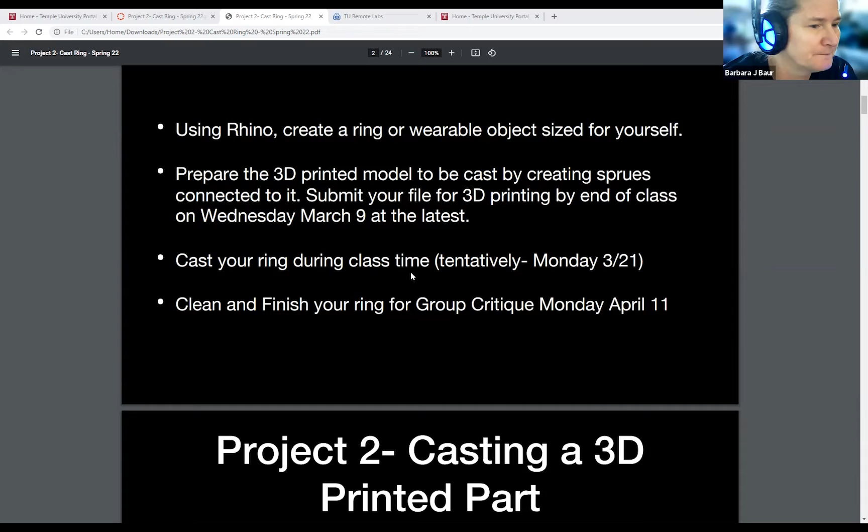So here's the dates around this project. They will show again at the end of the presentation. And by the way, you do have this presentation in Canvas.

So we're introducing the project today. Next week, we're going to have one-on-one meetings about your project. You should have sketches by then. Then the files are due for submission the day we get back from spring break, that is Wednesday, March 9th.

We're going to work on post-cure and investment casting. Post-cure means that our castable resin needs some preparation before it can be used in the casting process. This involves first cleaning the support structure off of it and sanding it to make the surfaces smooth, and then the 3D print tech will soak it in glycerin for a certain amount of time, and then give it extra time in the UV cure chamber of about an hour and a half.

So this is not something that you guys can actually do. It has to be done by the 3D print tech, but you have to prepare your 3D print part to give it back to the 3D print tech before they will do the post-cure process.

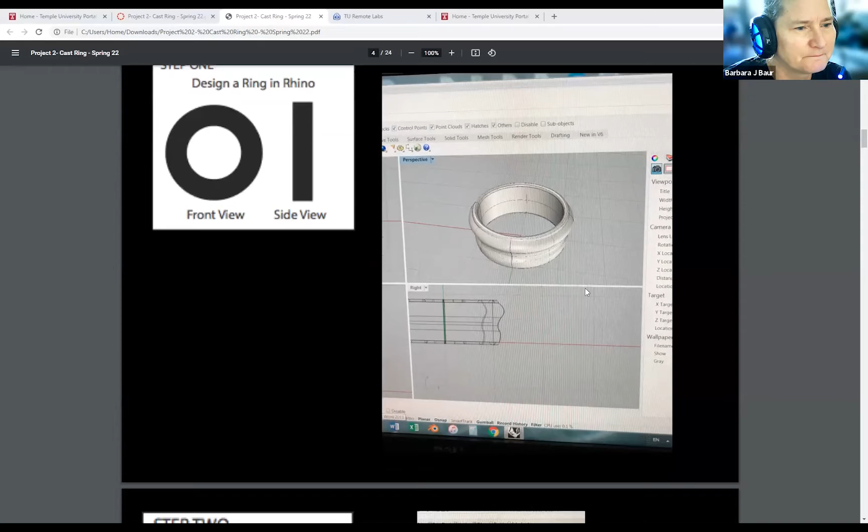So let's talk a little more about all the steps involved in this. As I said, there are a lot of pieces to creating a 3D printed part and then having it cast. So the first thing we're going to do is design a ring in Rhino. This is a real simple ring that I designed as an example - I basically used sweep 2 and a curve for the side and the inside.

Then we add sprues. For those of you not familiar with the lost wax casting process, these sprues are needed for the metal to have a place to flow into your ring. The metal comes in through the sprue and then into the ring area. I realize that may sound confusing if you don't know much about this yet, but trust me.

So we have to set up the sprues. This is just a quick idea about it: we have a big central sprue, we have another sprue here, and we can do sprues on the inside of the ring that get cut out. There's a lot of different ways to sprue it, and it all depends on what your ring looks like, because not every ring is sprued the same way.

The next thing we'll do is go through Netfabb, which is a file cleanup program that we use. It helps make the mesh more printable. We have to export our Rhino objects out to an STL file, which stands for stereolithography.

And then we'll send it to Netfabb, we'll fix it in Netfabb, and then we'll submit that file on the server to the 3D printing folder under Form 2, under castable wax.

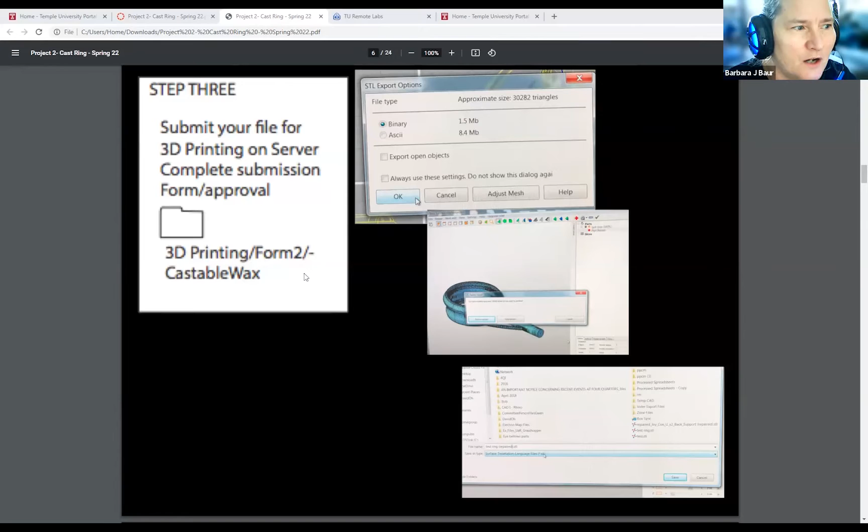Anytime you submit anything to the server, I must approve it. We have to send a form to the 3D print tech saying there's a file that needs to be printed, it's for this class, and this instructor approved it. So you and I will be doing this process together.

Step 4, we'll get it back. This is what it's going to look like. It's going to have all this little support structure stuff on it, and we don't necessarily want to keep that. We have to get that cut off.

We're going to have a sprue on it. In this example there is no sprue on this, but we will have one. There are certain special tools that we keep in the tool room for this process. We use the plastic cutters meant for cutting 3D prints or plastic. We don't use our metal tools on these.

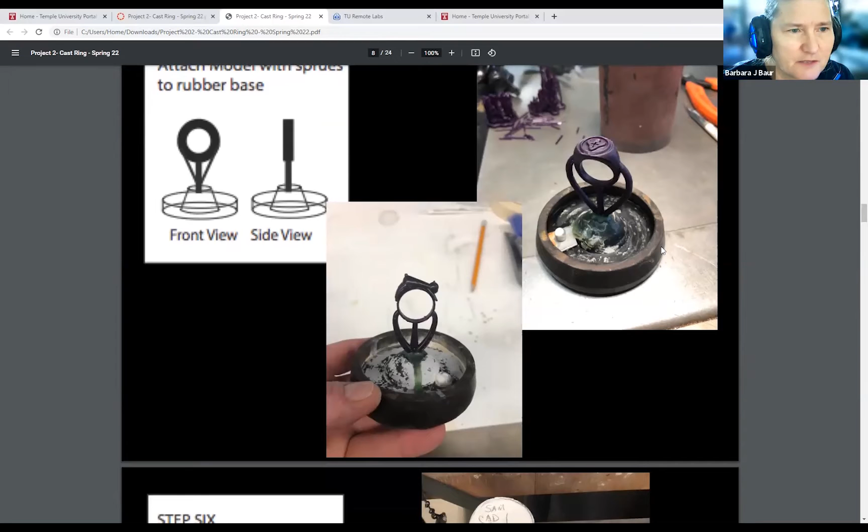Then we'll also sand out the little spots where these attach. And then we'll take the ring and the sprues and attach it to one of our rubber bases. The rubber bases match the flask, which is this cylinder in the back—like an empty can made out of steel. So you see I have two different rings here that have been attached into the rubber base.

Before this happens, though, we have to weigh it. I thought I had a photo of that, but we have to weigh our wax so that we know how much metal we're going to need when we cast this.

The next thing we do is we invest, and this has nothing to do with putting our money in the stock market or in certificates of deposit. What this has to do with is putting a plaster-like substance called investment.

Like plaster, it has a certain timed cure time, and we have to work within that time. We have to follow carefully, be clean, and be very aware of time while working on this. It's a timed process, and our investment will cure usually within 12 to 14 minutes, and we only have about 7 minutes total to work through this whole process.

So we will go over this during class. I'll take you into the back and show you the investment area. I will go through and invest things with you.

As the investment cures, you see we'll mix it up, we'll pour it in, and this is what the top is going to look like. This is what a fully invested flask looks like. We will mark it with names, class, metal, and the weight.

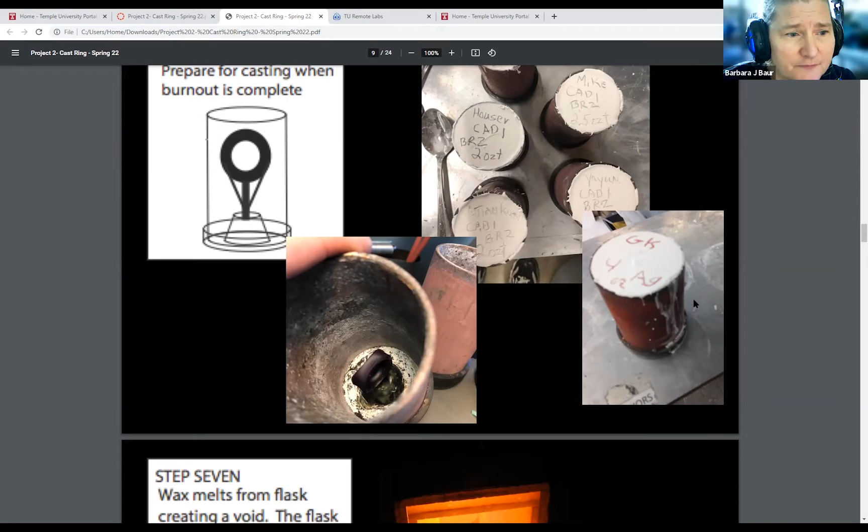Here we go. The 3D print tech will then take off the rubber base—or rather, whoever is going to start the burnout. We normally have a casting tech in MJCC, but this semester we do not. It's usually a grad student, but because of the situation this semester, all the instructors and the tech have to step up and try to do that for you.

So I will actually be starting the burnouts for our class. And that's why I said I'll be coming in on a Sunday night and I'll be starting the burnout.

At that time, I'll take off these rubber bases and load all the flasks into the kiln for Monday on Sunday evening, and I'll start the kiln. The kiln goes through a process where it stays at certain temperatures for a certain amount of time, then ramps up to a different temperature. It starts at 300 degrees, stays there for 2 hours, then goes up to 700 or 900. It's programmed - this is called a burnout cycle. Once I start it, it runs by itself until the next day.

After it finishes the burnout cycle, it holds the flasks at casting temperature, which in this case is about 900 degrees. We'll come in and adjust the kiln to change the casting temperature if needed. Sometimes when pieces are really thin, we'll up the casting temperature a little. If we're working in bronze, we'll maybe keep it at 900 to 1,000. It all depends, but generally the kiln sits at 900 degrees until we do something with it in the morning or afternoon.

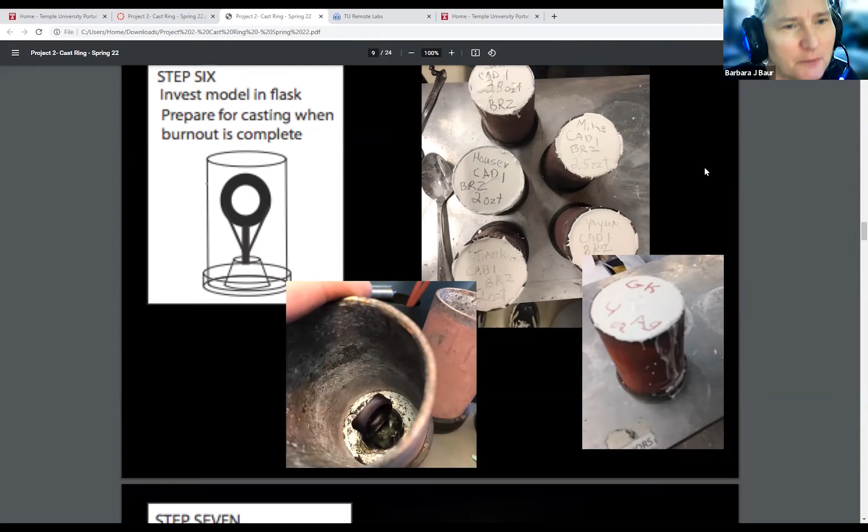It'll stay like that for 8 hours after the burnout finishes. If the 8 hours passes, the kiln will then stop staying at 900 and the temperature will start to drop. Once I come in, I'll be adjusting the kiln, and we may even start casting earlier if any of you can come in sooner than 12 o'clock on the day we're casting. We'll talk about that as time gets closer.

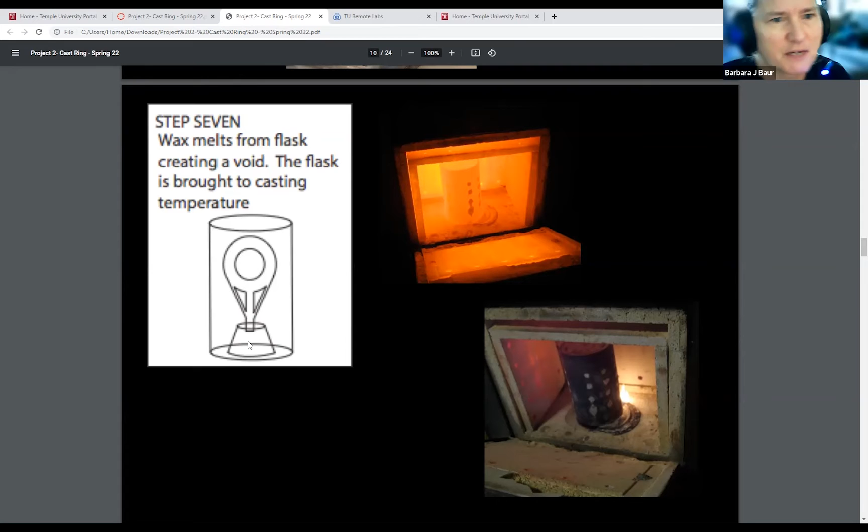So this is what happens during the burnout process - this is a different kiln, not actually ours. But in the process, you see the wax melts out from here. It's the resin-wax combination that melts through the bottom. Because we had this, you see this little bump - it's called a button - and we attach our sprues to that.

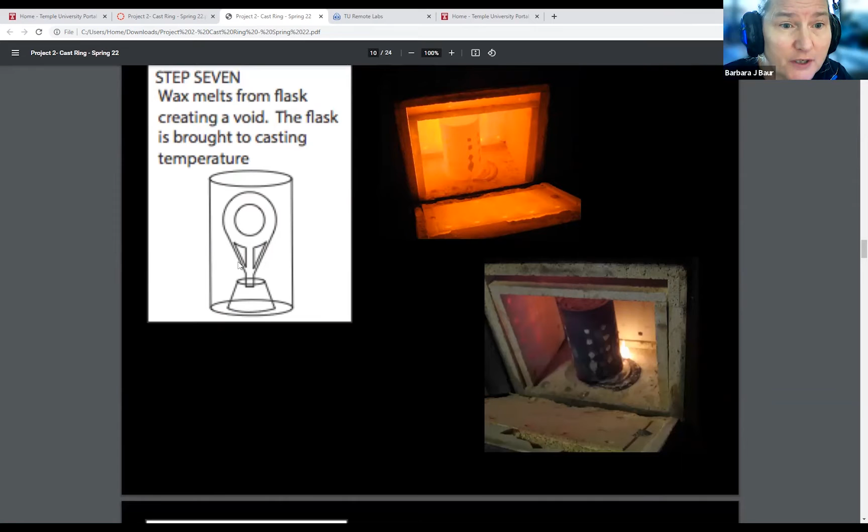When the rubber base comes off, that becomes like a little funnel, and that's going to help direct your metal into the void that will eventually turn into your ring.

So we'll then use our centrifugal casting machine - this is what we have in the back. By the way, this photo was taken before COVID, so we used to just stand back there close together, huddled around, watching the casting machine, then the lid gets pulled down and the casting happens. The centrifugal - what happens is the whole thing spins inside here. But now it's just me back there with you. We'll both be masked, have eye protection, and wear welding jackets to be fully protected.

So we'll melt the metal in the crucible in the casting machine. I'll pull the flask out of the kiln with tongs, because remember it's at 900 degrees or so. After it's spun around and the molten metal goes in, we'll pull it out of there and set it for a minute or two so it comes down to a temperature to quench it. If we quench it right away, we run the risk of causing cracking in the metal if it cools too quickly. So we want to let it cool so the metal is able to fully stabilize.

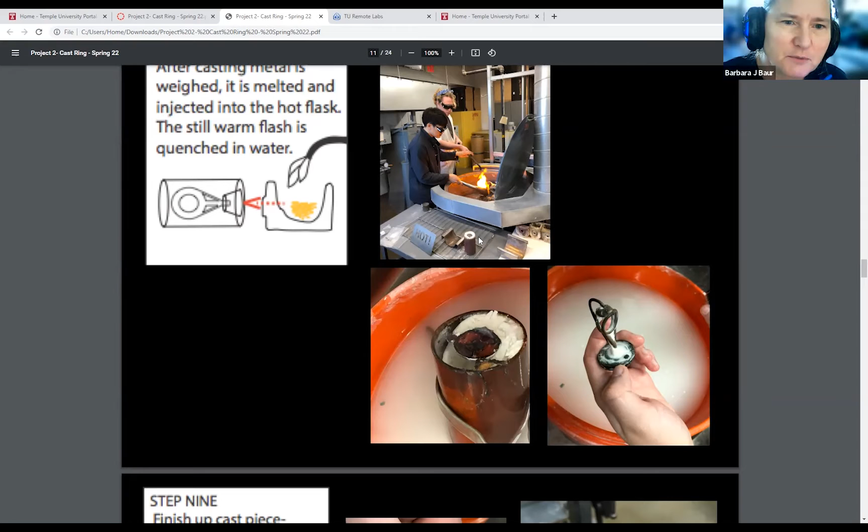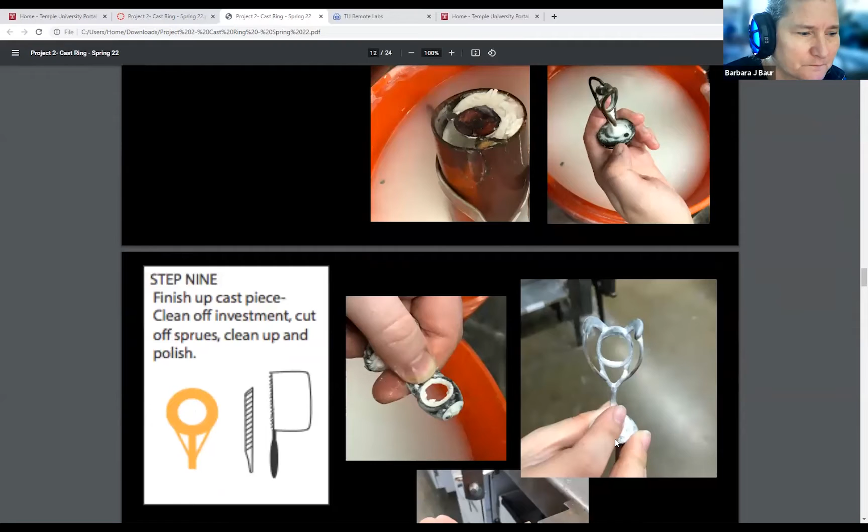Then while the flask is still hot, we'll put it into a bucket in the sink in the back area, and then start to clean away the investment. All of this was wax, or castable resin rather.

To finish up the piece, we'll need a jeweler's saw, files, perhaps some abrasive paper. We may use the scratch brush polisher. We've got some options - we could possibly buff them, use different finish ideas. We can use liver of sulfur to change the color of it. But this is how we'll get the metal piece.

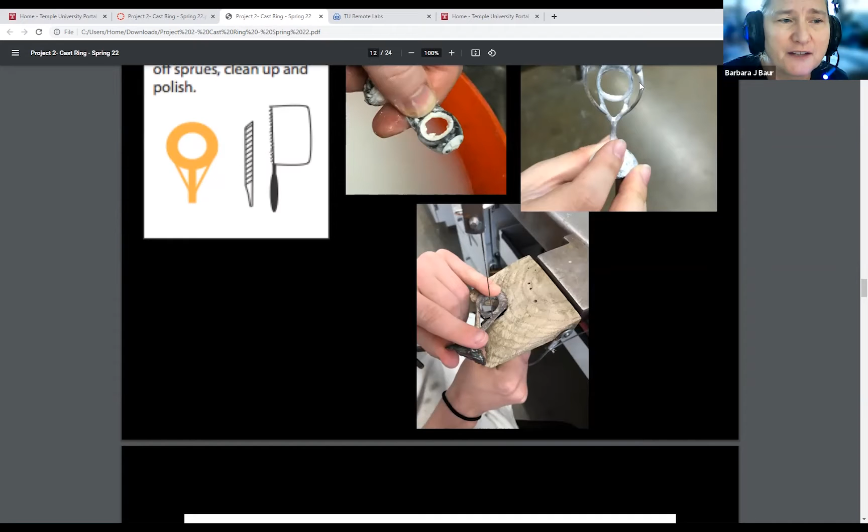The sprues will all still be attached, and we'll clean them up. This is why sprue placement is important - you want to put the sprues somewhere where you can cut them off and easily finish it so you won't see where the sprues were before. Here's that piece as it came out of the flask, and here it is after finishing.

Okay, here are some other examples. This was from two semesters ago. There's another one.

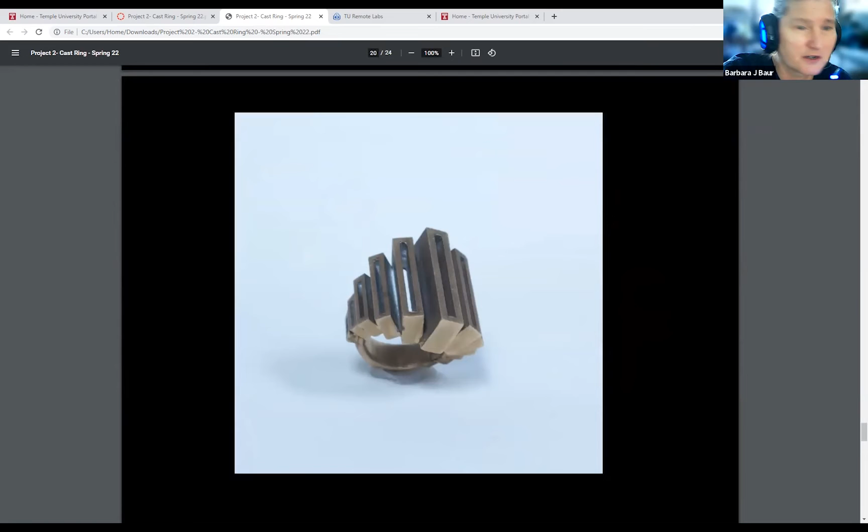Here's one from last semester. Here's another one from last semester. This one's from a couple semesters ago, if any of you know Teddy Kaplan, the senior. Great stuff, this was from last semester. These are all CAD 1, just so you know. So you have the potential to make things like this as well.

So here's our project overview again. We're going to use Rhino, and we're going to make a ring. We do want to measure our fingers, so we'll need to do that in class using calipers.

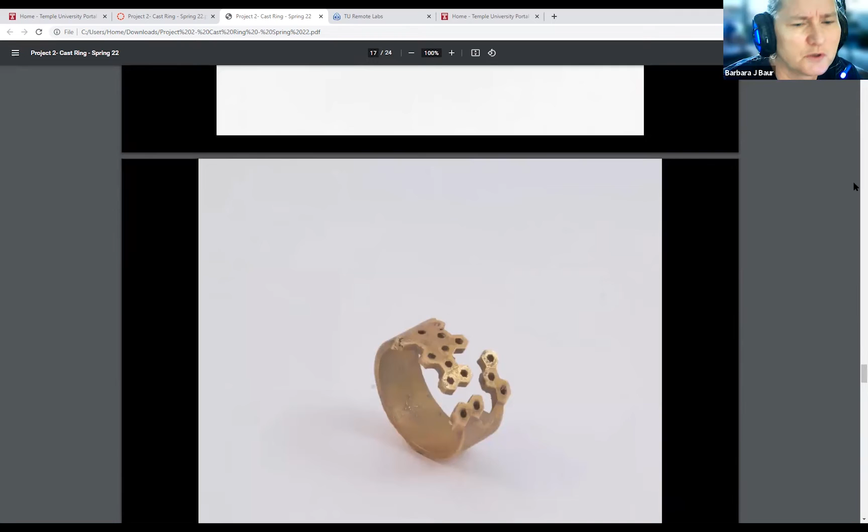Then we're going to prepare the 3D model, add the sprues in Rhino, and submit our file for 3D printing by... I don't think that's the correct date, I thought I had a different date up here. Where am I at? Wednesday, March 9th, okay, that's a month from today. We have a month to get these files done.

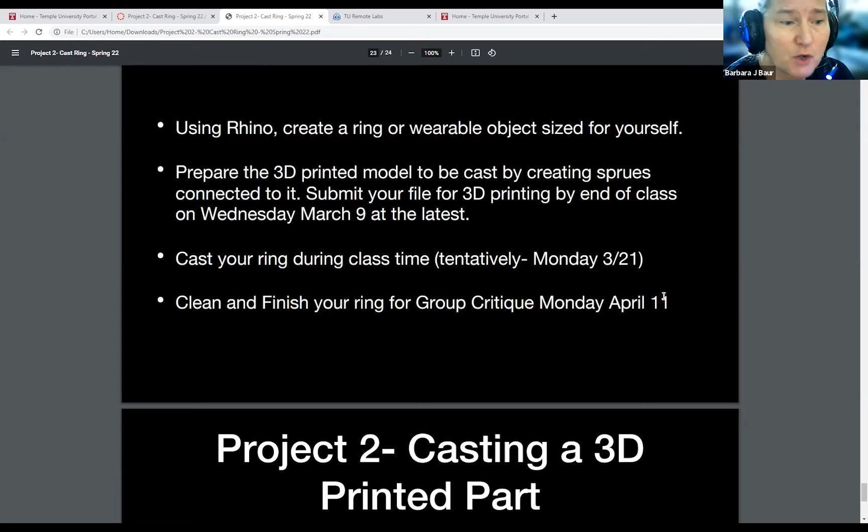End of class, Wednesday, March 9th. Then between cleaning off the support structure, post-cure, and investment, we'll need to get those invested flasks done so we can cast for Monday, the 21st of March. I'd really like to get everybody done during the same class period.

Then we'll take those metal rings and we will have a group critique on Monday, the 11th of April.

Here's more of our— this one definitely. Yeah, it's not Monday, March 7th, it's March 9th. And then the post-cure investment is probably the following week. I'll edit this, I'll make sure the syllabus is updated.

Okay, that's a lot of information. Does anybody have any questions? Nope. Okay, so maybe you remember from when we first went over the syllabus, the materials for this are included for bronze.

If you decide you want to cast your piece in silver, you are welcome to do that, but you will have to pay for the silver. We keep silver in the tool room for this project for just that purpose, and we have forms now that we use to connect with Brad Lunsford, our studio tech. Brad will set aside the metal you need. You will get enough metal to cast the piece, including the button, the sprues, and the ring. But after you finish casting, we'll cut off the sprues and the button, and they'll get returned to the tool room, so that all you pay for is the metal in the ring and not the metal in the entire casting. This is actually really helpful, because that way you don't have to pay for a lot of silver you're not going to use. That is, if you want to cast in silver. Otherwise, bronze is included, and that is included in your course fees. And so is the cost for the 3D printing, the 3D printed part that we will have.

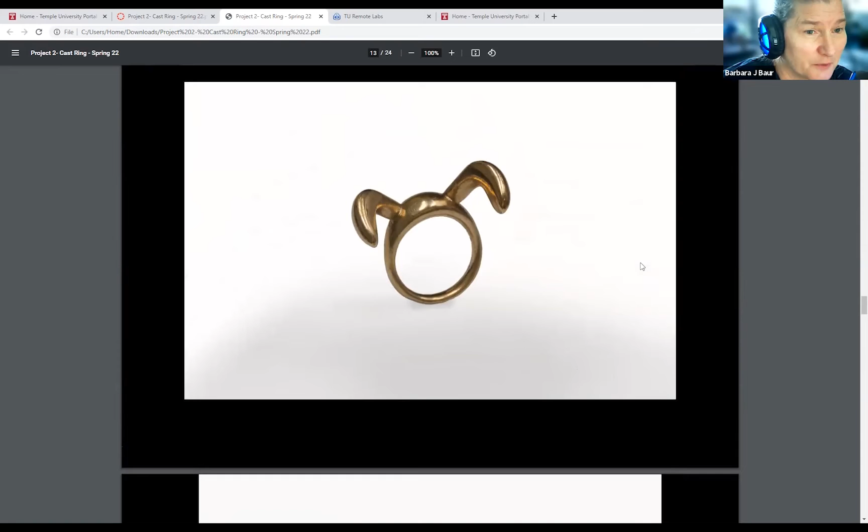This was actually done— it sort of looks like a sub D construction, but this was actually done before we had sub D. This was done two years ago, I think, now.

This was just a basic sweep-two or network surface command. Here you can see some of the spots where the support structure was connected and not cleaned off as well as it possibly could have been. So that's one of the things you're going to want to keep in mind.

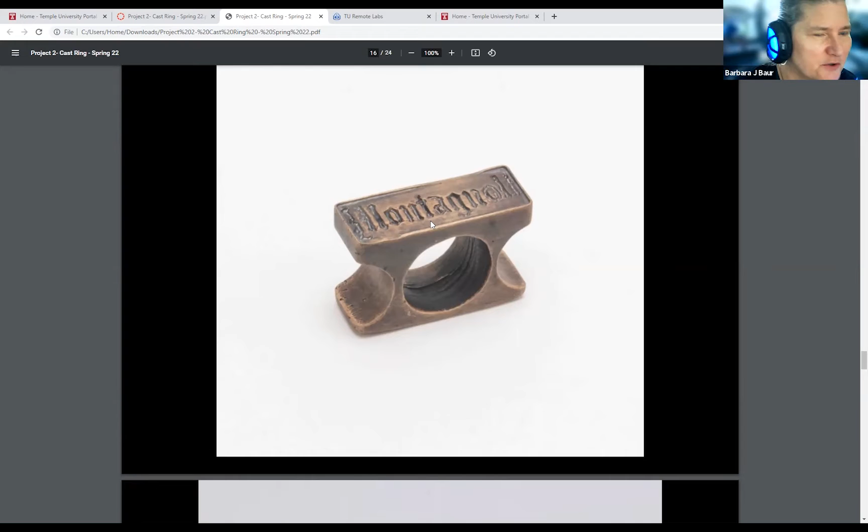So this was kind of fun. You can do stuff with this - it's a ring that fits, allows space for the two fingers on either side. It's a heavy ring. We've got a name differenced out.

We found that our success rate has gone up exponentially, because failures like this used to happen randomly. You can see a little crack over here - we would get porosity. What was happening was during the burnout part of the process, you have your piece melting out of the inside.

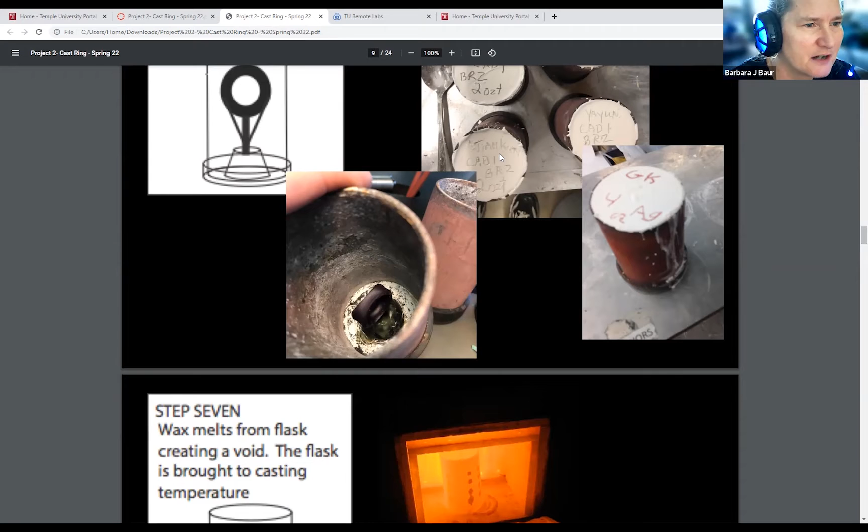This is where the resin is, and it melts. In the heating process, the resin actually expands a tiny bit. And if the investment is in a really intricate pattern, the pattern can break up a little, and then you don't have as smooth a surface anymore.

One of the things that has helped is the post-cure process, where we soak the part in glycerin and then cure it more in the UV light. That helps stabilize the piece so that during burnout, those expansions don't happen, which break up the investment.

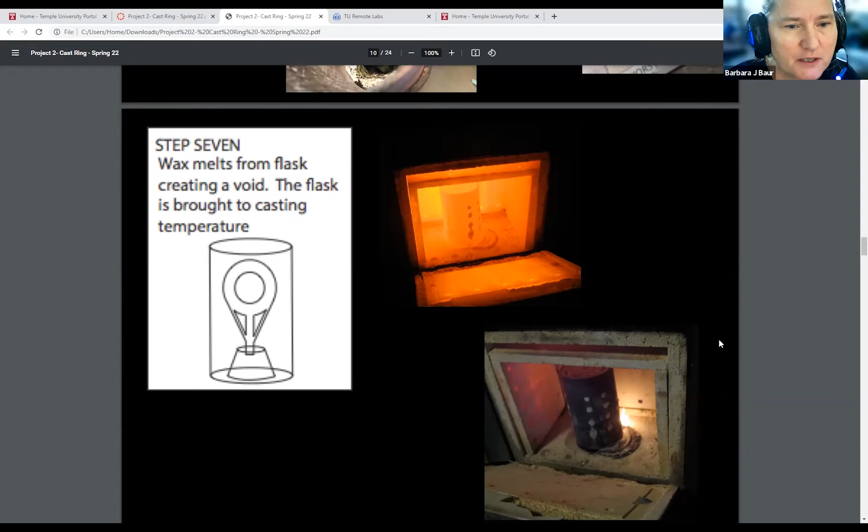So basically, this was laid out flat in Rhino. I'm going to show you some of these commands and techniques.

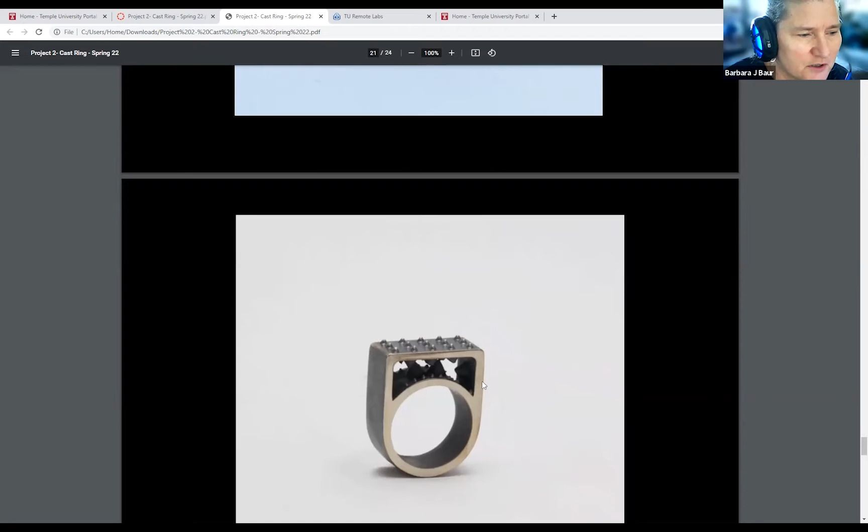This piece was colored using liver of sulfur. Teddy put it in liver of sulfur and then polished the sides, so you can see it's kind of darker here - it's darker on the inside and dark in this area. But this outside part, and on the other side as well, is shiny silver.

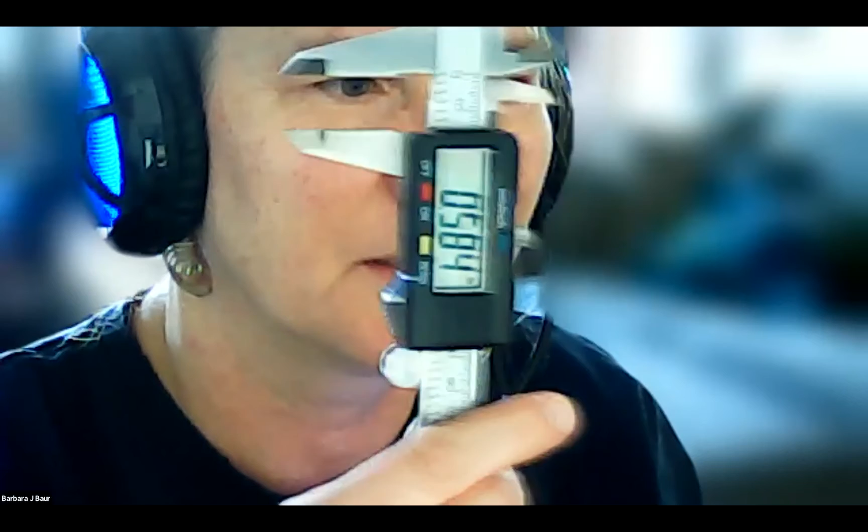Then I'm going to look at the number here. It says 0.584. So that's my left pinky. Your right and left hands, once you start measuring them, you'll realize they are different from one another. Okay, so that's 0.584. I'm going to write that down as left pinky.

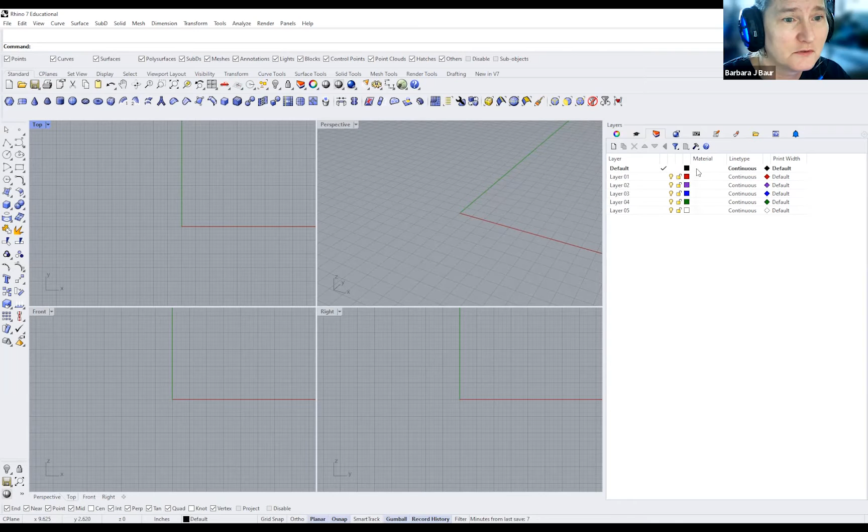So as I said, my left pinky is 0.584. Did somebody have a question? No, okay. So I'm going to go over here to the right hand panel, and there's this little tab here that is actually notes. I'm going to make some notes because these notes will stay with this file. I'm going to say left pinky measures 0.584 inches, and this is the finger that I'm designing for.

One thing you want to keep in mind too is that the diameter of your finger for rings actually changes throughout the day. On a more humid day, your fingers may swell. On a cold day, your hands may shrink or contract. So you want to try and measure your fingers a couple of times just to make sure.

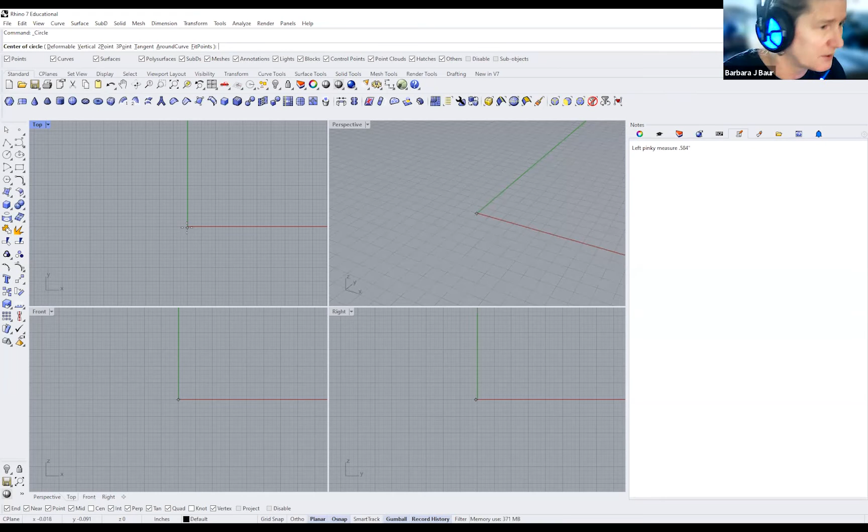Let's see what else we got here. So now what I'm going to do is create a reference for that. I'm going to start with a circle. It's asking me for the center of the circle - 0,0,0, that's where we're going to put it. And it's asking me for diameter, so I'm going to put in 0.584. Enter. All right, and that's where we're at.

Let's go ahead and pull this on the top. I like to make one of my layers a reference, so I'm going to call it pinky size reference. Let's put the 'i' in there - pinky size reference. And I'm going to move this curve here, this circle, to that object.

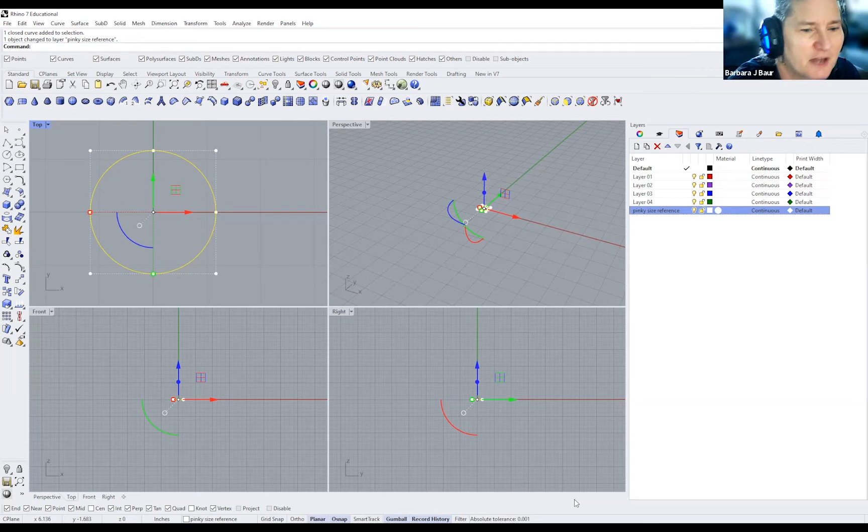Okay, do we have a new chat? Could we also measure our own rings that we know fit? Yes, you can, absolutely, and that's actually not a bad way to do it, especially if you wear that ring on a regular basis. I'll show you how to measure the inside diameter - you actually use the other part of the caliper, the piece near the top. But bring it to class and we can measure that. It's also important to try and measure your fingers too, and just get a feel for it. Great question though, Claire.

Okay, so we have this here, that's our pinky size reference. Now once we go building our ring, we can hide that or show it. But one thing I do want to do is lock that layer. But before I do, I'm going to make a copy of it. I'm going to call this working ring design.

This red layer - I'm going to take this and make a copy of it. See how it says copy objects to layer. So now there is, and it doesn't look like anything happened, right? But if I lock the white layer, I can hide it.

All righty. Sultan, are you having internet issues? Okay, I guess so. Yes, sorry, that's all right, that's okay.

This happens, just keep coming back. And let's see, Anne, you raised your hand. What do you got? Go ahead and unmute yourself and you can just yell out. Oh, I didn't mean to, I'm sorry. Oh, okay. All right, no worries.

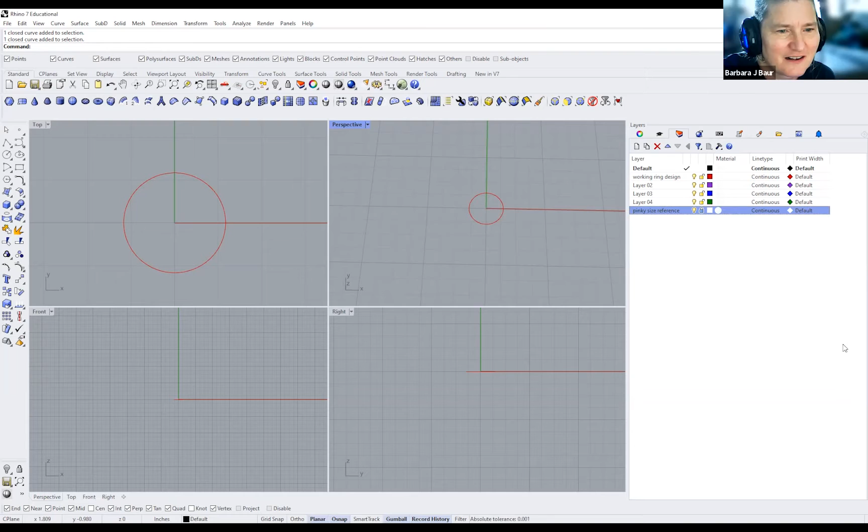Okay, so here I've got my ring size. So there's a lot of different ways that I can start to make a ring here. One, I can do the example that I showed you in our presentation, which was done with like a sweep 2.

What we can do here is I'm going to make a line from the midpoint. I'm going to make sure my quad osnaps are on. Yes, they are. And I'm going to go over here to the quad, to the right-hand side there, and start my curve there.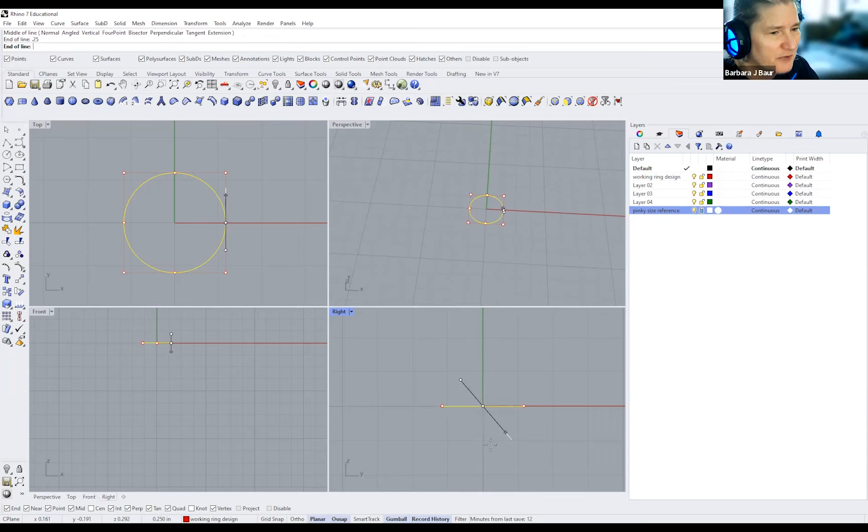And over here in the front viewport, or the right viewport, I'm going to hold down Shift. Let's see, if I want my ring to be like a half inch thick, I'm going to make each end of this line 0.25. So I'll do that and hold down Shift, and now this line is a half inch long. That could be the side of the ring.

And now I'm going to take a control point curve and go like this. All right, and there. I'm going to hit enter.

Right now, by the way, we have the default layer. That is our current layer, and remember, wherever the check mark is, that's where all the new geometry is going to end up on that layer. So that's why all these curves I'm drawing are black.

So I could join these two curves. Right now, if I select them, you see it says '2 curves added to selection.' You can see a lot of what you're doing up here in the command line. So I'm going to use the Join command, and now it says '2 curves joined into 1 closed curve.' Remember, Rhino tells you what it's doing all the time. So I've got 1 closed curve.

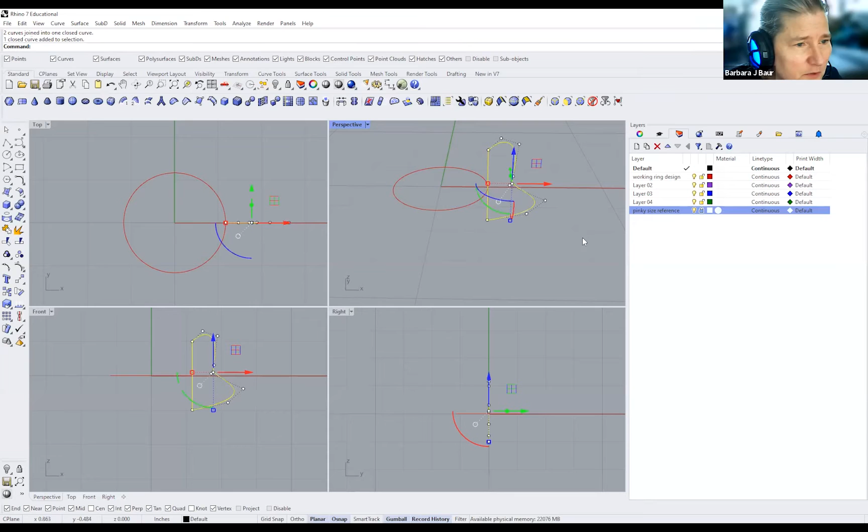I can use the Sweep1 command, and it says select rail. The ring here would be our rail. I'm going to hide our size reference. Then it says select sweep shapes, we're going to do that, and I'm going to hit enter. Okay, it says 'drag seam point to adjust, press enter when done.'

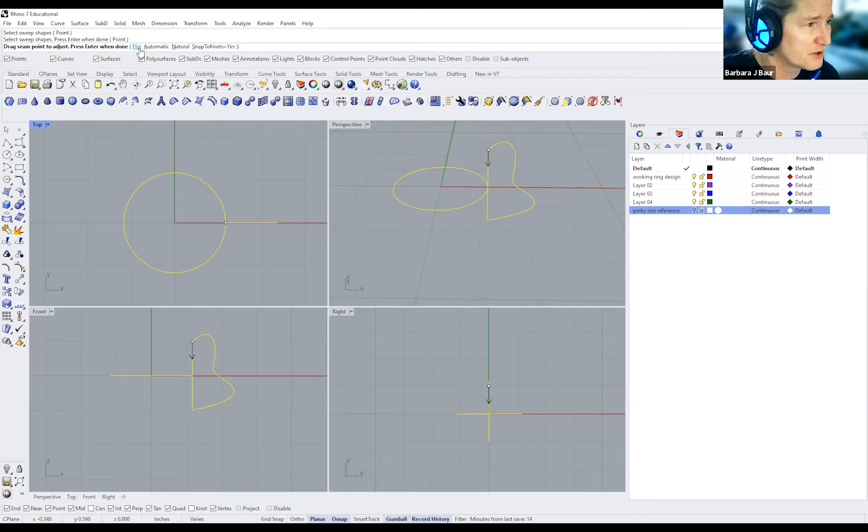All right, that seam point looks fine, we only have one. And here I'm hitting OK. Wow, and we're still in wireframe here. Let's go to ghosted so we can see what that ring looks like.

So we know this is the ring size that we have. I can tell you right now that this ring is going to be too small, even if that's the finger size. When your rings start to get really thick in this direction, you need to make them a little bigger in order for them to fit on your finger and be comfortable. This ring will feel too small, even if that is the diameter of the finger we measured, especially for a pinky ring. Pinky rings should be smaller.

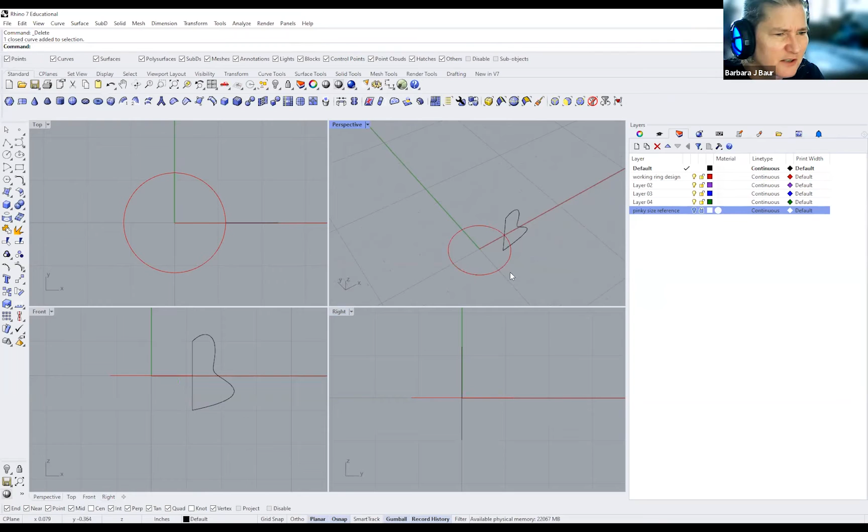So I'm going to delete this, and I'm also going to delete this. But before I do, let's take a look at how thick that ring really was. Let's use the Distance command, DISTANCE, and we're going to go from here to here. My goodness, that's 0.299 inches. That's more than a quarter inch thick. That's really thick, and to have that much width on both sides is a lot.

I'm going to delete this, and I'm going to show you another way. We're going to take this curve and I'm going to drag up. I'm going to tap Alt—if you tap Alt when you're dragging, see, it even says it in the command line, you'll get a little plus sign next to your gumball, and that means I made a duplicate. So now I have 2 curves. We can do another similar thing that we were doing with the sweep, but now we can use Sweep2.

So there's one curve there. And now we'll do this again, except this time we're going to make it a little more refined. Let's go here. Maybe we'll do this. Okay, and I like that. So I'm going to mirror it.

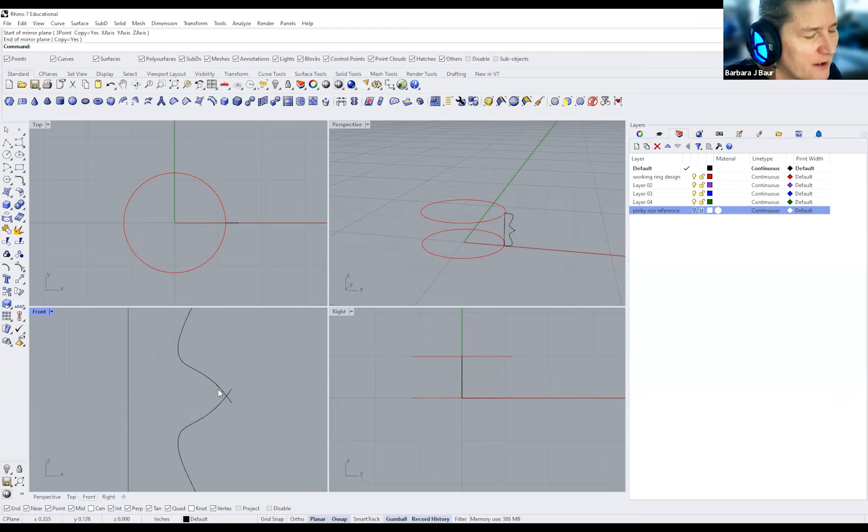I'm going to make a copy of it from the midpoint here to here. Those overlap, so I'm going to use the trim command. Remember, we just learned the trim command. I'm going to click on trim, and now I'm going to go here, and here. We're going to hit enter.

Okay, so the trim command broke history on those two objects. I'm also going to join those two. And now if I click on this, we have all the points. I'm going to delete that one. That'll make that a little bit nicer.

And now, instead of just sweeping that one around, I'm going to join this. Two curves joined. And now I'm going to mirror it. Let's try and do something a little more interesting, right?

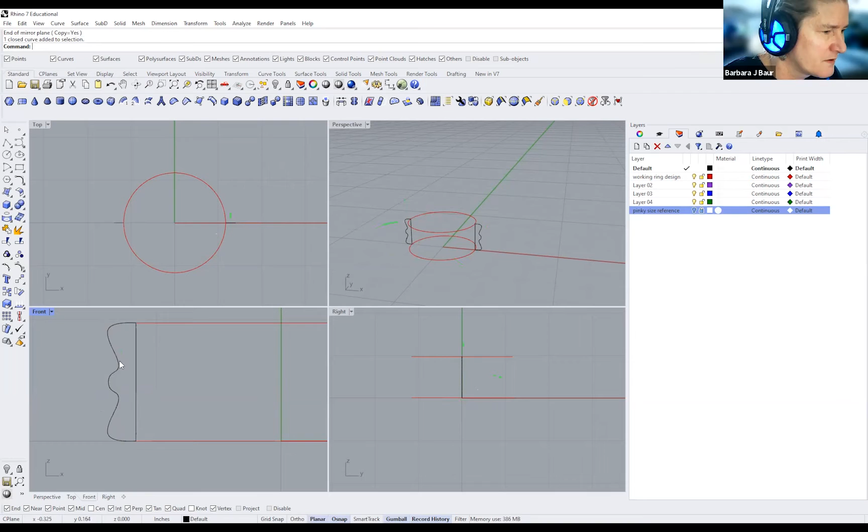Now we're going to take the one on the other side, bring up the points on there, and I'm going to change this. Okay, and maybe go this way too as well.

Oh, that totally flattened them out. Let's undo that, I didn't want to completely flatten it out. Let's go here, take these 2 points and go like that. All right, so this is 2 separate kind of profiles.

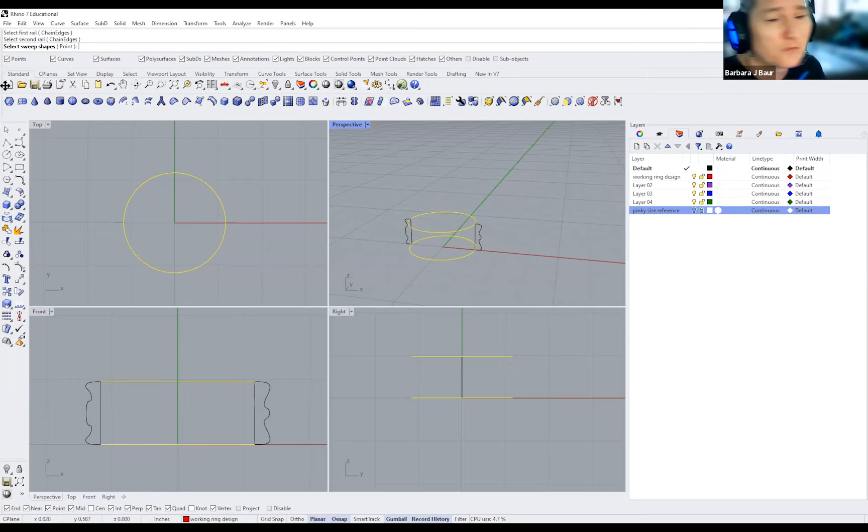And so what we could do now is we could use a command called sweep 2, similar to the one I just showed you. And we're going to select these 2 rails, select one rail, select second rail. Remember, our command line is telling us exactly what it needs. Now it says select sweep shapes. So we're going to select this guy, then we're going to select this guy.

With the sweep 2 command, we could have had 15 of these all the way around the edges. But what's important is that you choose them in order. I only have 2, so it's not as important, but I'm going to hit enter. Here's one thing that is important: we want to make sure those arrows are facing the same direction in relation to one another. Meaning, if you're sweeping around, you want both of them to face up.

I can show you what happens if we don't, but I'm not going to do that right now. I'll show you that in a minute, but they're both facing the same direction. That looks great. I'm going to press enter. And so that's what we're going to do. One thing we are going to want to say is closed sweep. We hit OK, and here's what we have.

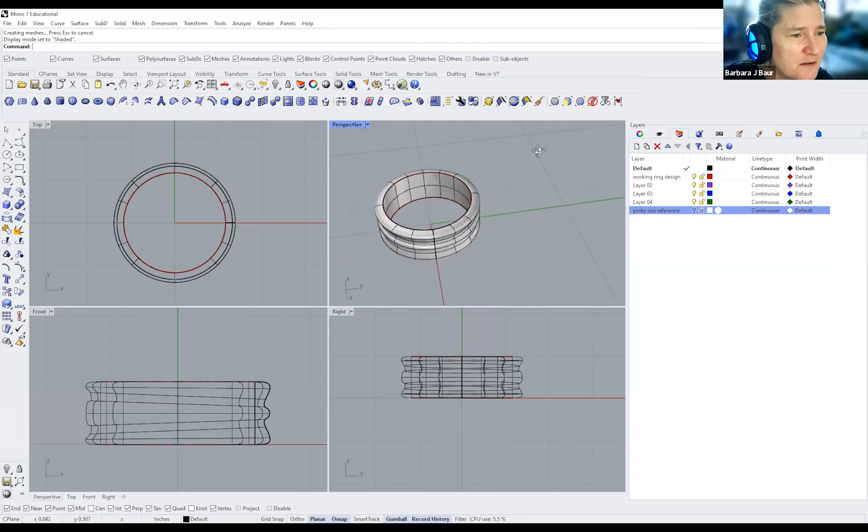I can make this shaded, which makes it more solid. And we can see that we have that kind of band in the middle just by having it one shape on one side and one shape on the other side. This band has sort of a little idea of movement or something. But this, so this is a nice basic ring.

Let me undo that real quick, and I'll show you what happens if those arrows are facing the wrong direction. So let's go and do sweep 2 again. The command is sweep 2, or sweep 2 rails. You can find it under the surface command. So select the first rail, and here's the second rail.

You always need two rails to sweep on. They can be closed or they can be open, but they both have to be either closed or open. They have to be the same in terms of that, but they don't have to be the same shape. So I'm going to choose this guy, and then I'm going to choose this guy. I'm going to hit enter.

And now if I click on this and make that, you see how these arrows are facing different directions? If I hit enter and tell it to do a closed sweep right here, this is really weird, right? What happens here is it got twisted on itself.

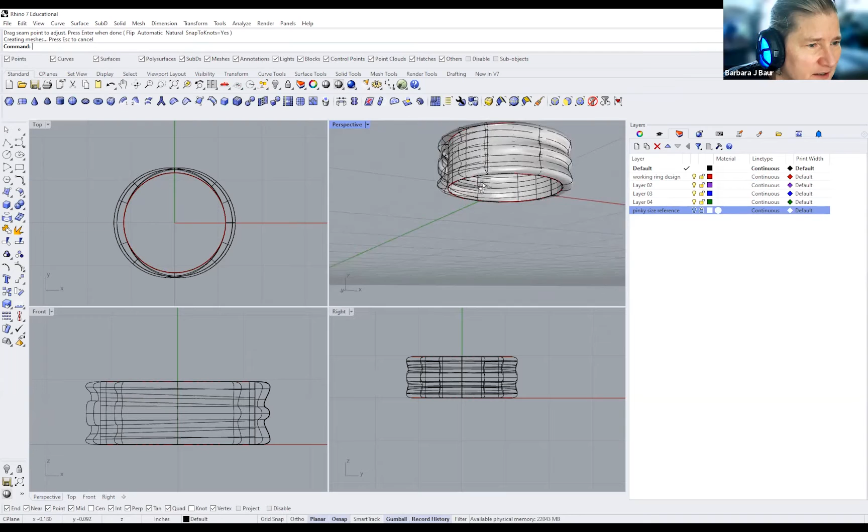And this is in shaded, but let's see what happens if we do show edges. It should have... yeah, it's got edges, but well, anyway, we'll close that, the edge analysis. But this is not correct. This is not printable, it actually intersects on itself here. So let's undo that. Undo again, undo again, undo again. No wait, redo. Okay, let's go back.

What we can do is make a copy of that shape and rotate it. We'll make a copy, and the center of rotation is going to be the center of that circle.

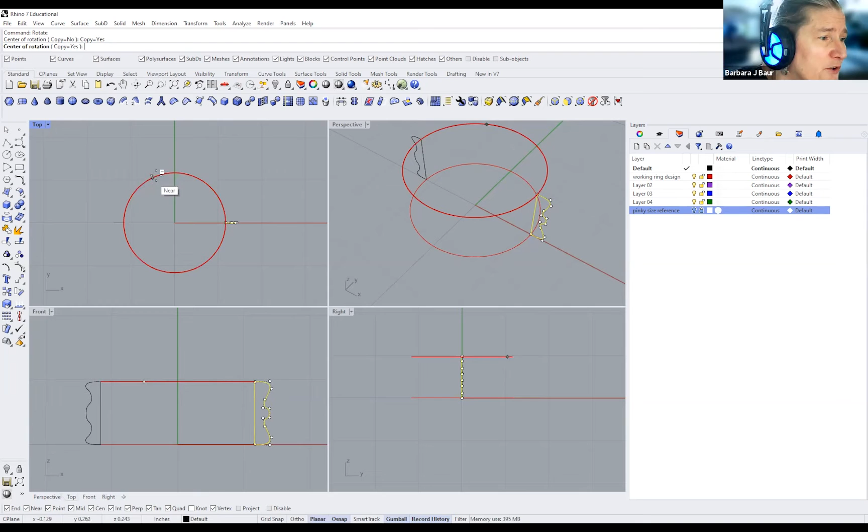Remember, with your center O snap turned on, you run your cursor around the outside, and when it lights up with the little CEN, that's when you can click. That's the angle of the first reference point. I'll click here, then put one up at our quad O snap. Yep, it says perpendicular, so it'll give me that, and we'll put one over here too. I got the quad there, and I'll hit enter. Now I have 4 of these, and you can see the 2 I just added showing up here.

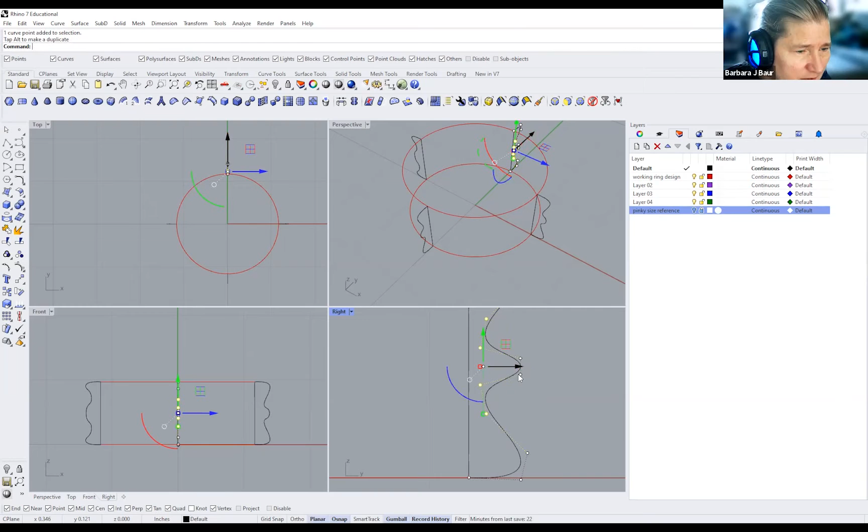Now here I can create a little more variation. We can go really far in, hit OK, hit this here, and move that way. And this guy, we'll do that, go here, OK, and we're going to move that out a tiny bit. So you can see we have all these different shapes now.

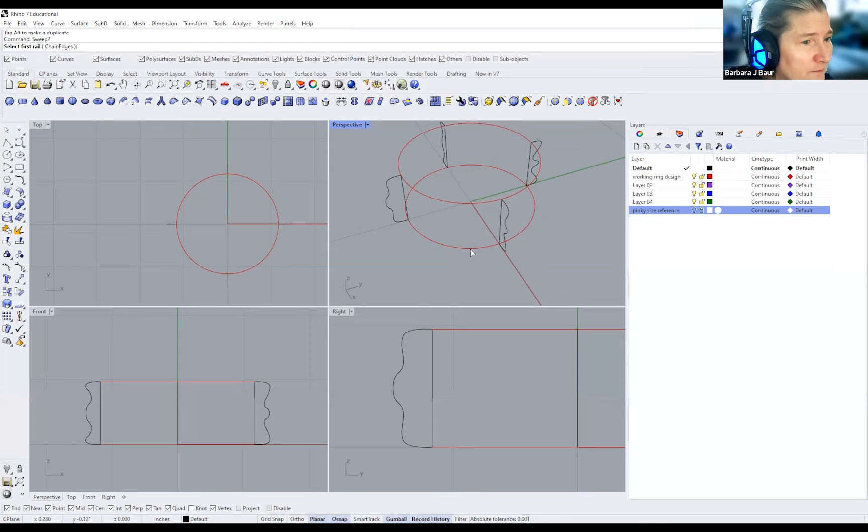I'm going to do sweep 2 again. Select first rail, select second rail, and now we just do the shapes—we don't hit enter. Remember, I have to do these in order, so I'll go 1, 2, 3. Our top viewport makes it easier to keep track of the order, and you can see all the arrows are facing up. I'll hit enter again, click close sweep, and here's what our ring looks like.

A little silly, not too bad—it's not that different from what we had before, but we had a little more control over how the shape transitions from one to the other. That's our ring.

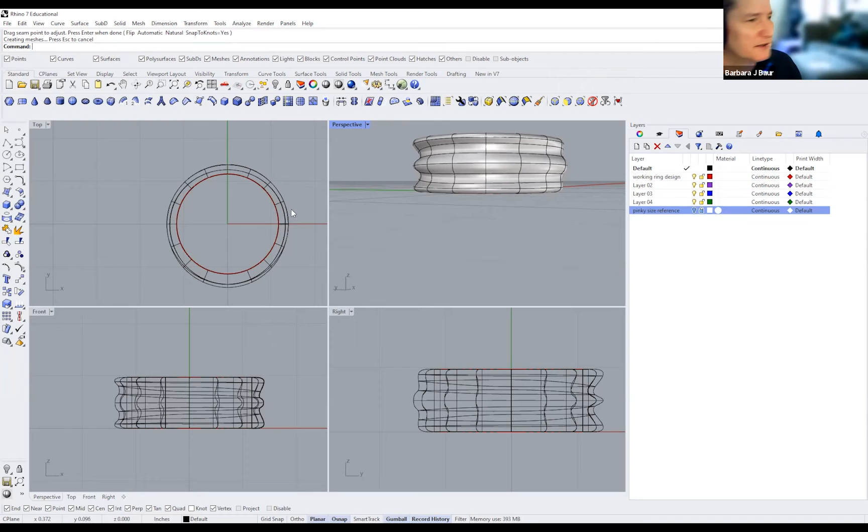Now what we're going to do real quick is show you how this ring would get sprued. Spruing is kind of an art in itself, and it depends on your piece. As I said in the presentation, you want to try and attach your sprues to a place where you can easily clean up. One place I can easily clean up on this ring is the inside, which sounds a little nutty, but that's where I'm going to put the sprues.

I'm going to use a control point curve and go here. Remember the elevator mode—I'll hold down control before I click so I can move my cursor into the middle of this ring. You can see where my cursor is in the perspective, right, front, and top viewports. So I'm going to click and move out to the middle of the ring.

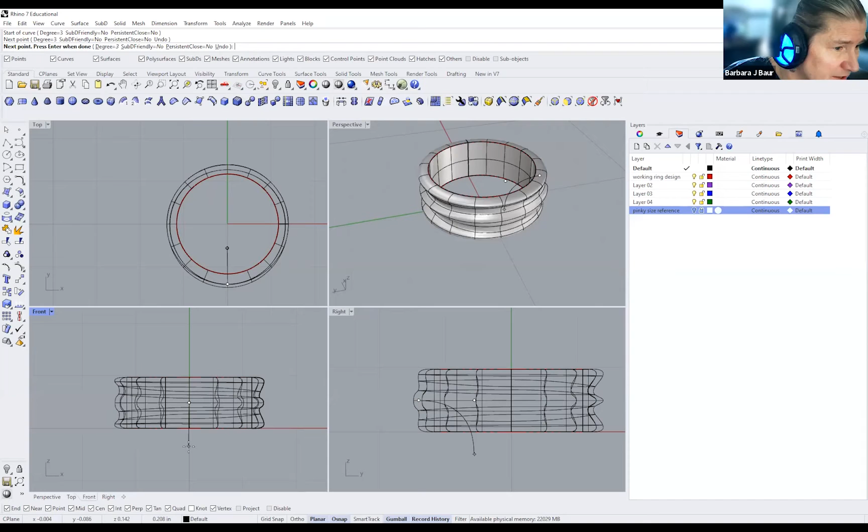Then I'm going to start to move down—you can see what it looks like there. I'll click there, and also move a little more towards the middle of the ring. Now I'll hold roughly at 0 and move down again. I'll hit enter, and now I've built this curve. You can see it goes from the side of the ring down to the middle.

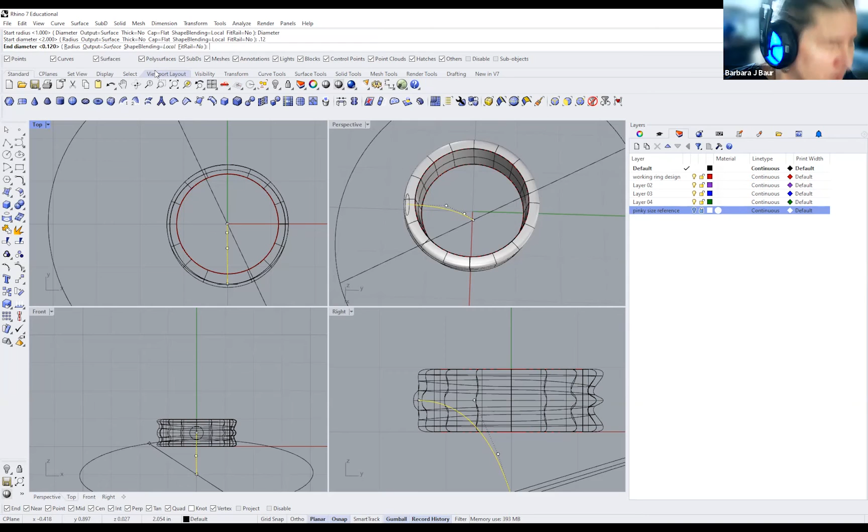I'm going to pipe that, P-I-P-E. This command creates a pipe on a curve, so I'll make the diameter about 0.12. I know how big 0.12 is because I have a set of calipers I can check, plus I know from experience that's not a bad thickness for a sprue. The end diameter is also going to be 0.12, and there we go.

So it's a little thick—maybe a bit too thick for this ring, depends on the piece. I'm going to redo that: delete, and pipe again. Remember, if you right click it brings up the last command. So I'll make this 0.08. Okay, and there we go—that's probably a better thickness, actually.

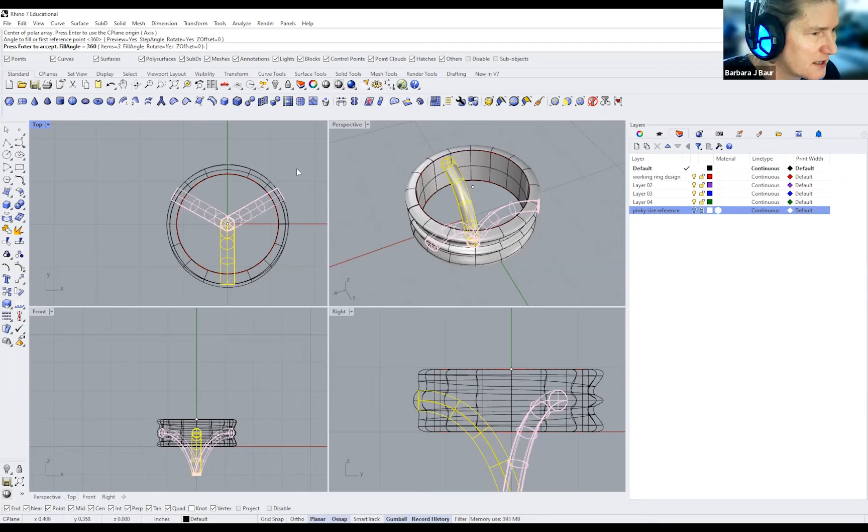So what I can do now is take this and use a command called array polar. I'll use the center O snap again, and use 3 of them—that's a good number. But I don't like that, they're sticking out the outside, so I'll hit escape.

Let's do that again, but this time we're going to select not just the pipe, but the curve too, so we can rebuild each of these. Let's take the curve and use the polar array.

Let's type it in and spell it correctly, Barb. Array, polar, enter. The center of the polar array is there. Three, and there's our three curves.

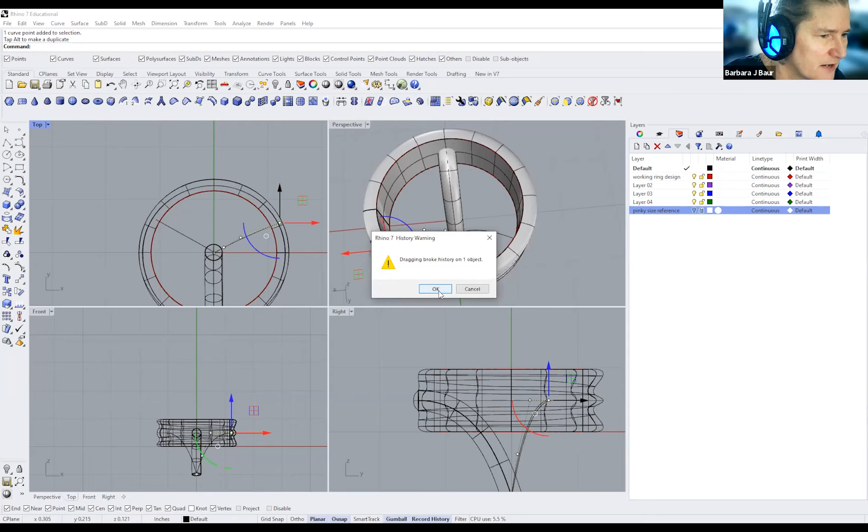Now I can take these and play a little more with them. Like I can move this one in. It's all right, because we don't want our sprues to hit the outside of this ring. So we're going to put that there.

Now we're going to pipe these, P-I-P-E, enter. That's fine. Actually, what I should do is take the curve for that one and move it a little bit so that these don't overlap. Now, because I have record history on, see how that pipe updates all by itself. I keep record history on so I could use it for those kinds of handy things.

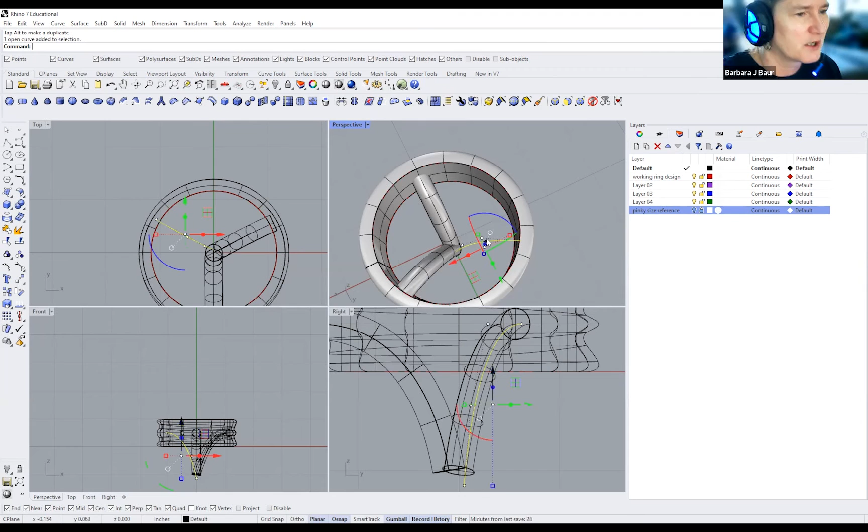Before we do the other one, we're going to move that pipe a little bit too. We don't want these pipes to have the same exact geometry in the bottom here, because if that happens, the Boolean union command will not work. We'll find out about that in a little bit. So we're going to go pipe, P-I-P-E, enter, and we're going to keep that at 0.08. There we go. So we now have these three sprues that come out.

I'm also going to put a thicker sprue. I'm going to put a poly line roughly in the middle here and put it right here. I can see in the right and front viewports where my cursor actually is. I'm going to hold down shift and go down about a quarter inch, enter. Then I'm going to pipe that as well, but I'm going to make that 0.12. Actually, let's make that 0.15. Enter, enter. There we go.

So now these guys are leading into this other sprue, and this sprue can get put into the button.

So what will be the last thing that we do? I would save this before I do anything else. I want you guys to get in the habit of saving. So I'm going to save this, and I'm just going to save it on my desktop. I'm going to call this demo ring 1. Okay, and I have saved that.

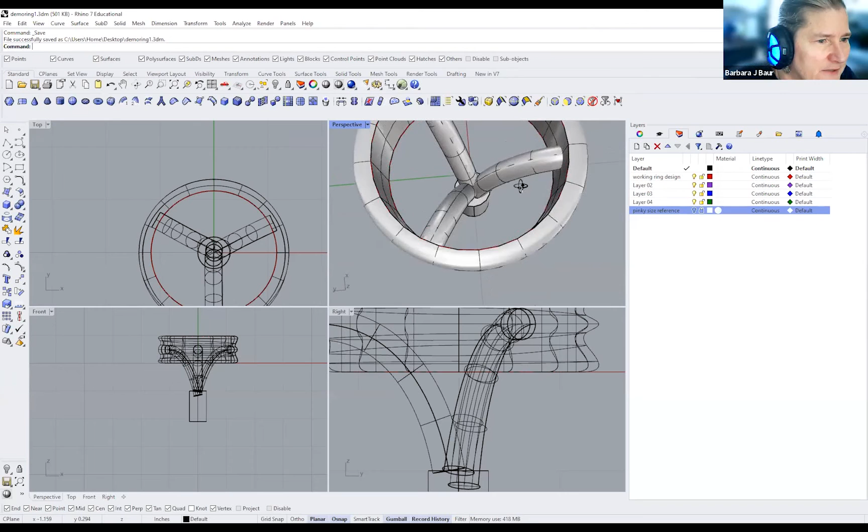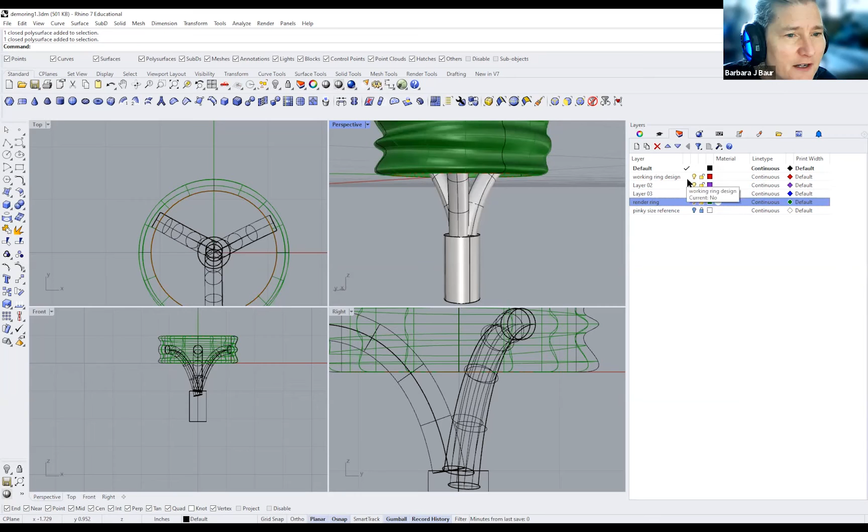However, before I go any further, let's say this is my final ring. I want to make sure that I save this off to another layer. Let's call this layer render ring, and the reason we want to do that is because we're also going to be making renderings of our rings. I'm going to copy that to that layer. So if I make that the active layer and hide the default, all I have there is the ring.

This is great. So I'm going to go back to working ring design. I'm going to hide the render ring, and we can see just those two curves that I had. I'm going to also make another layer for the sprues. I do this when I'm casting things: I make another layer for the sprues, then another layer for the entire thing, and I call this unioned for print.

Okay, so the sprues, I'm going to save on my sprue layer. I'm going to change their layer, change object layer, that's going to be my sprues layer. And then the working ring design, which is my main guy here. Actually, let's hide those sprues right now. We're going to take everything here and put that on the working ring design.

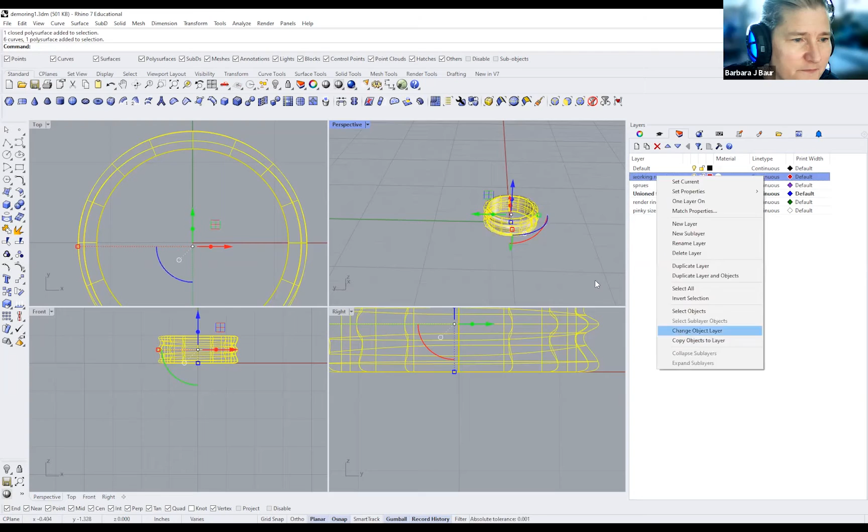So when I show my sprues, we can see here that we have the ring and we have unioned for print. I also have another one just for rendering. I like to keep one spare somewhere. Sometimes I'll save that as a separate file, but there's the green. So we're going to keep that one hidden, and we're going to keep our reference size also hidden.

And in unioned for print, I am now going to take everything except curves. This here area is my selection filter. You can bring that up, but I'm going to close it right now. You can bring it up by typing in selection filter.

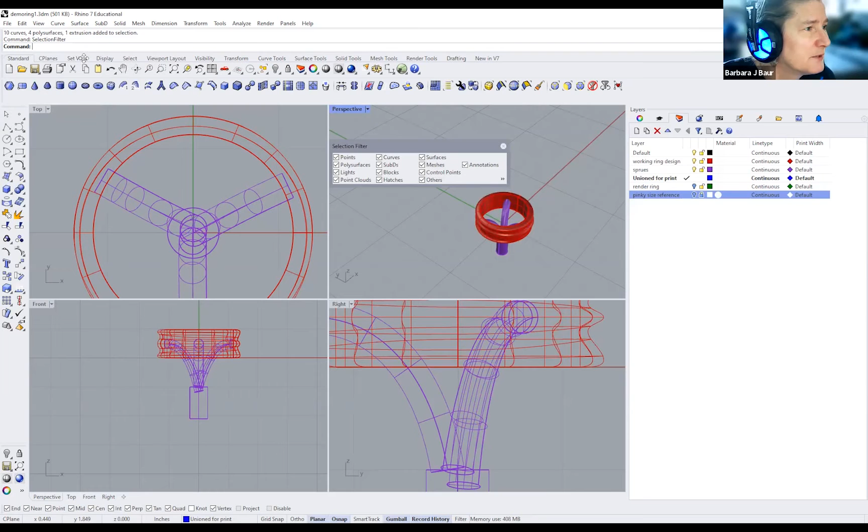Okay, I like to keep it docked up here so I have it all the time. Right now what I'm going to do is uncheck curves, which means I cannot select curves. So by selecting here, I've gotten the solids that I need to create my union that's going to get printed.

I'm now going to copy all those to this layer, unioned for print. And now I'm going to hide the ring and the sprues. Now all I have are these.

What I'm going to do now is use the Boolean union command to check these for naked edges as I do the unioning. This will also be my final piece to go out to print, but let's check all these pieces first for naked edges.

The way we do that is we go Show Edges, and here's our edge analysis. Right now it has non-manifold edges, I'd like to get this checked. This is the color that'll show us if it found any naked edges.

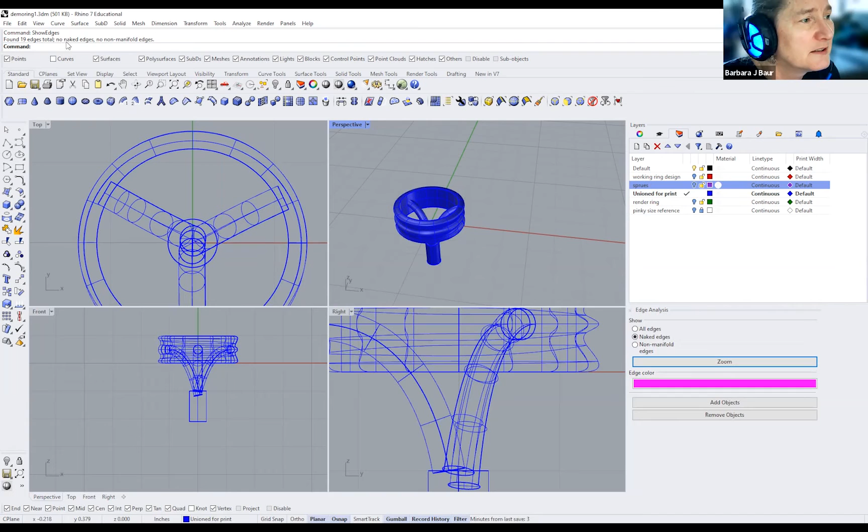But we can also look up here in the command line and see that there are no naked edges. It already found that out for us, which is great. But we're going to leave the edge analysis up anyway, because sometimes naked edges happen as you Boolean things together.

Boolean union is a really powerful command in that it can take solid, closed solid objects, and specifically surfaces or polysurfaces or extrusions, and union them where they intersect. We're going to take these two pieces and type in Boolean union, hit enter, and it says creating meshes.

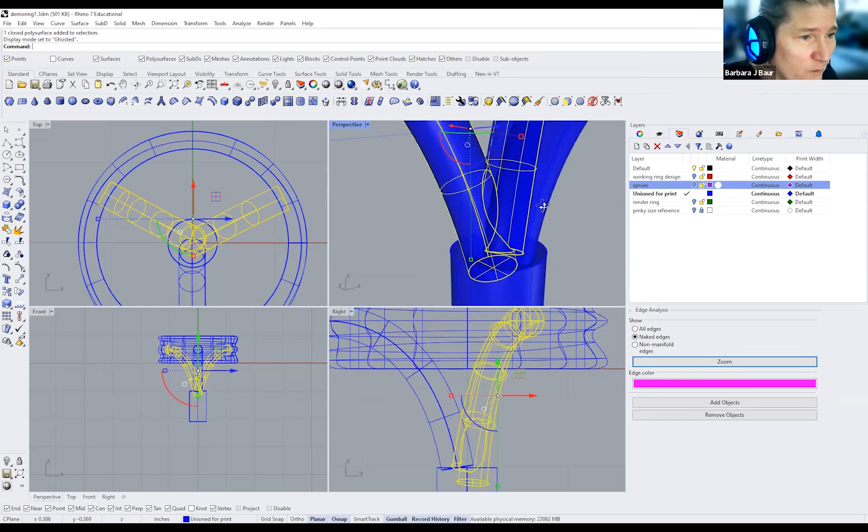So now you can see when we click on that, those two things are the same. If we look at this in Ghosted view, we'll hide these other guys. You can see that now they are joined here and there's no overlap inside. The outside surface of this has been combined from these two.

Now let's show our other hidden parts. Let's get this, and we're going to use the little icon on the side here. It says Boolean union, and again it created those meshes.

One of the things we want to check as we do this process is we're going to add the objects here and make sure now it has more edges, 25 edges, no naked edges, no non-manifolds. Great, that's what we want. We don't want naked edges.

We're going to union this, and I'm going to again hit that icon. It did create the meshes, press escape to cancel. Now the ring is still separate, you can see.

So now that's going to be the last union that we do. It's Boolean union there, it created meshes. Let's check for those edges one more time. Great, no naked edges.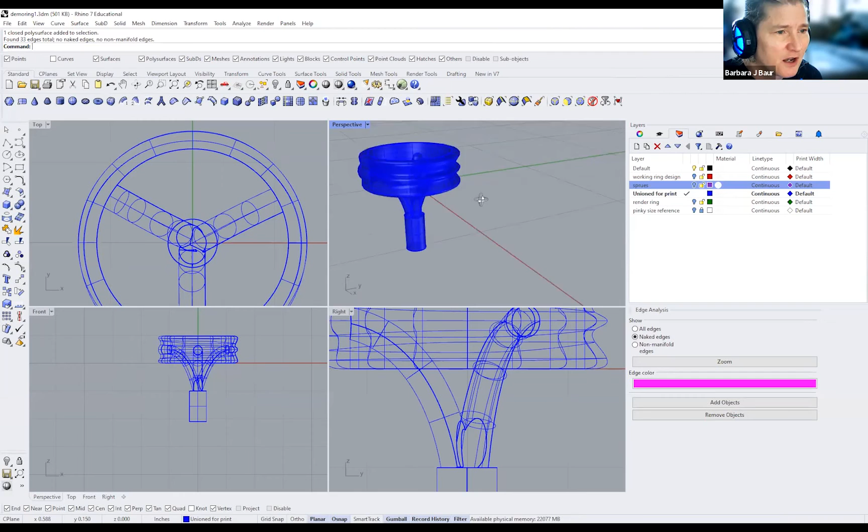This here is what we could send to the 3D printer in the print lab. So how do we do that? I'm going to give you a very quick rundown here just to get you through the whole design and print process.

We would select it, then go File, Export Selected. And now we're going to change the file type that we're exporting. We have to scroll down a bit and go to this STL file, stereolithography.

I'm again going to save that to my desktop and I'm going to call that demo ring 1. This time, okay, I'm going to hit enter. It's saving it as an STL.

We want to make sure that this number for tolerance is at 0.001 inches. If you work in millimeters, it has to be 0.0254. We'll remember that when we're exporting. Remind me if you work in millimeters when we're in this process.

I'll hit OK. It also asks if it's okay to do it in binary, and that is fine. We're going to hit OK.

And so now I'm going to close this, and we're going to go find that demo ring here on my desktop. Except you guys probably can't see that, I just realized. All right, that's okay, we'll stop there.

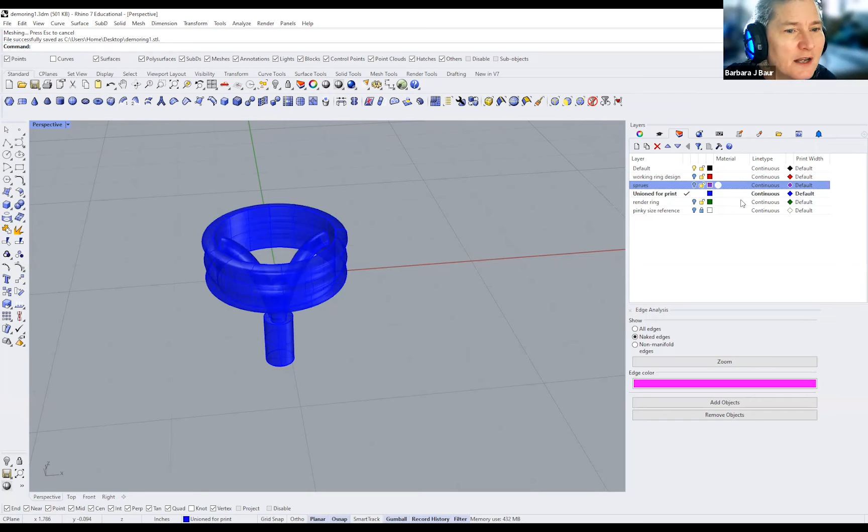Any questions so far about what I've showed you?

Okay, alright, well I'm going to stop that there. And did I stop the recording? No, I haven't, I stopped the sharing.

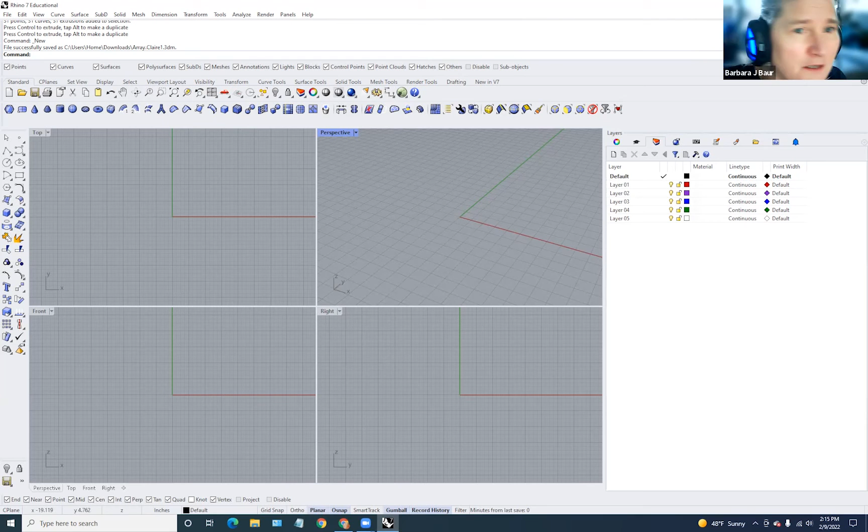So here, I'm going to take this and move it over to the side. We're going to bring this up, and I'm going to move my Rhino over to here a little bit. And we're just going to work in the top viewport anyway. And we'll move these layers over. All right, so this is what we're looking at here for this guy.

And this is tricky. So, as I said to a number of you, you can do this exercise probably 15 different ways. I know I put that number out a lot, but there are so many different ways to build this.

Myself, what I would do is I would start looking at the biggest number right down here, this 6. All right, I'm going to start with a polyline. I'm going to put it right here. I'm going to start it at the origin point, which is 0.

Okay, and I'm going to use my distance constraints. Okay, 6 - it's 6 inches between, and remember with a distance constraint, it stops it at 6. So I'm going to hold the shift out and put that there. Now, you may say, Barb, I don't see any 6. No, this here is 6 inches.

But I could also start by putting my little circles here. So what is this little symbol here? Does anybody know that? The circle with the line through it - do we know what that means? Anybody? That's okay. That's your diameter. And if you look at it, it really is telling you what it is. It's a circle with a line through it. And that, you know, the distance from one side to the other of a circle is the diameter.

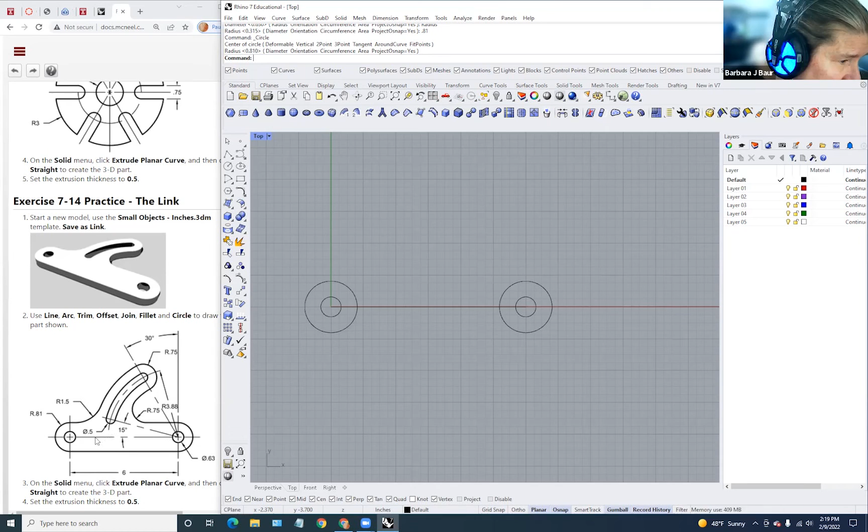So I can create a polyline. I like to do it this way. I'll create a polyline that starts here, and it's going to be 3.88 as my distance constraint.

And then I'm going to also, so I got that. And now I want an angle constraint, and that is 15 degrees. Wait a minute, there we go. And what this does is it stops it at different angles of 15 degrees.

So if I'm here and I go up to here, that's where it starts. That's good to know. I can do another one of these right here, and again my distance, 3.88, enter. And then now my angle is, look over here, we got 30 degrees, 30, enter. So here's my 90, then there's 30 right there.

So, but you know, you're going to tell me, look, these are just dotted lines. That's not part of the schematic it's asking for. No, it isn't. But right here, we can see that the diameter of this circle here, which also means this circle here, is 0.5.

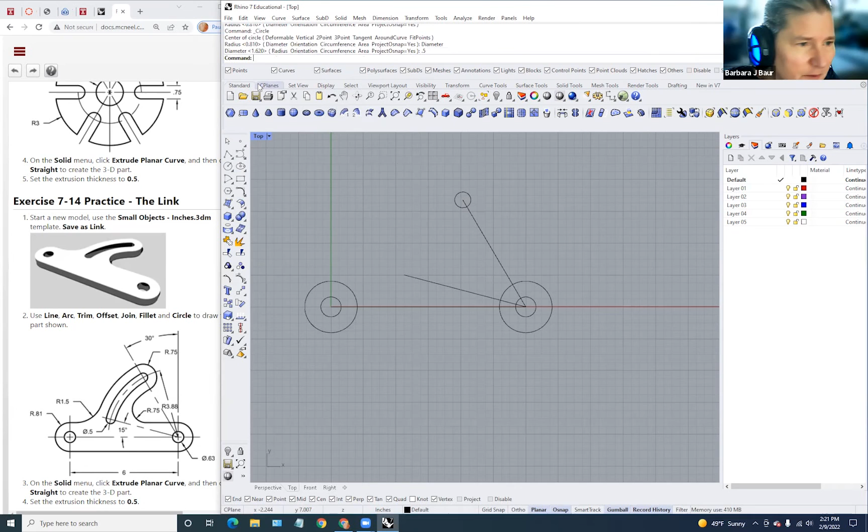And you can see that we have the same thing over there. I'm going to copy again. We're going to go from here to here. And we're going to hit enter. Okay, that's fine.

And now we've got a radius here, and this radius of this arc goes to center. There's a couple ways we could do this. We haven't really played in the arc command much, have we? Let's go with arc, center, start, angle. So here's the center, and the radius on that is 0.75.

And now you can go here, and then this is another spot where it's nice to have Smart Track. The Smart Track will allow you to, oh, there we go. If you hover your mouse over other parts of your model, it will sort of act like an Osnap, telling you, hey, over here. And that's what I did. I had Smart Track on here, and then I hovered over here, and it showed there. And then when I got to here, it also highlighted, so I could stop and click there.

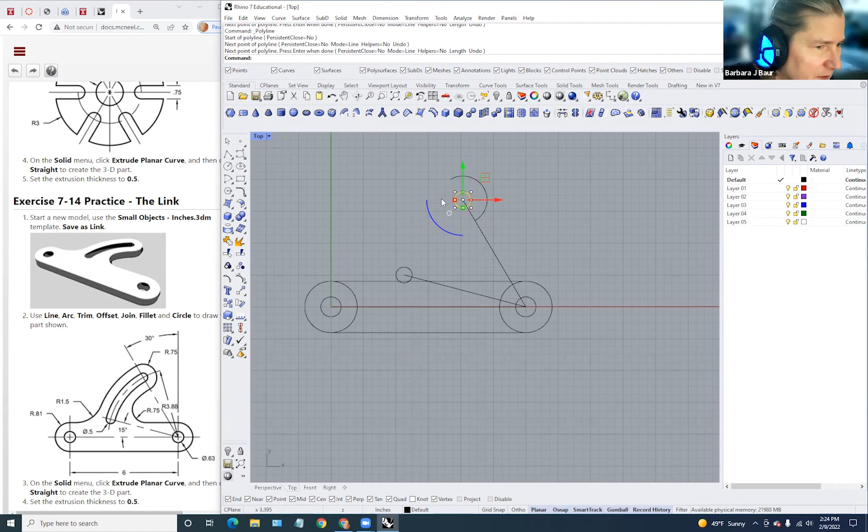Remember, we're going to do like trim and join at the end of all this. So we can see here that this body is done. Now, this is 0.75. So now we have to get these arcs in.

And that's also center, start, and where are we at? I think that one works. We go center, start, we got that intersection there, and we've got the intersection there. So now we have that.

And the diameter of this, we could use the diameter here and offset this by the diameter. Let's try that, offset.

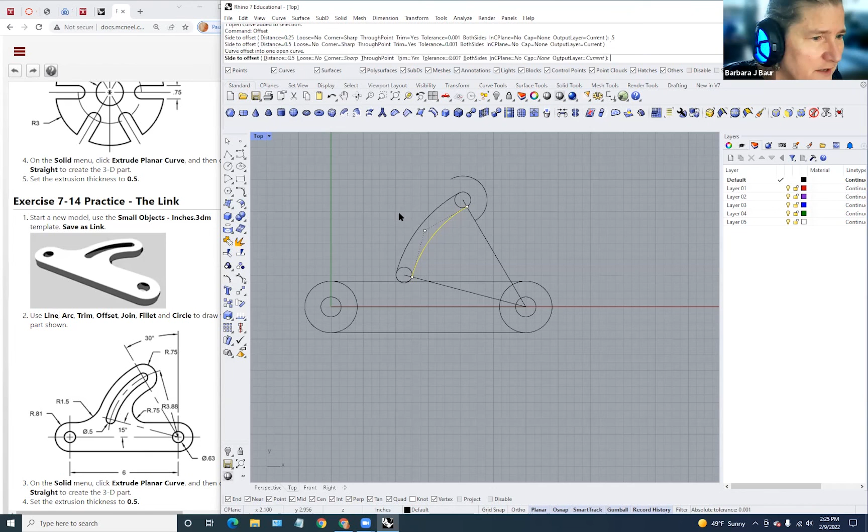And the diameter of that is 0.5, so let's go 0.5, enter, right there, click. This is a tricky exercise.

Now, if we want to do some math, we can look at this and figure out where we offset the difference between this diameter and this diameter, or radius, I'm sorry, radius. So we've got 0.75 and 0.5, so that's 0.25 out there. We can offset that, offset, and we'll make that 0.25.

No, that isn't right. My math is not right. Hold on, escape. It looks like it's the 0.5. Oh right, that's the 0.25. So that's 0.5 again. Let's offset that from 0.5. 0.5, enter. And there we go.

And we're going to do the same thing over here. All right, so all that we have left to do now is this arc here.

And that's where we're going to use this start, end, and radius. And remember, if you're not sure about which arc is which, just hover your mouse over and it'll say. So we're going to do the start of the arc on here. And I think we need a tangent too. Yeah, we have tangent on.

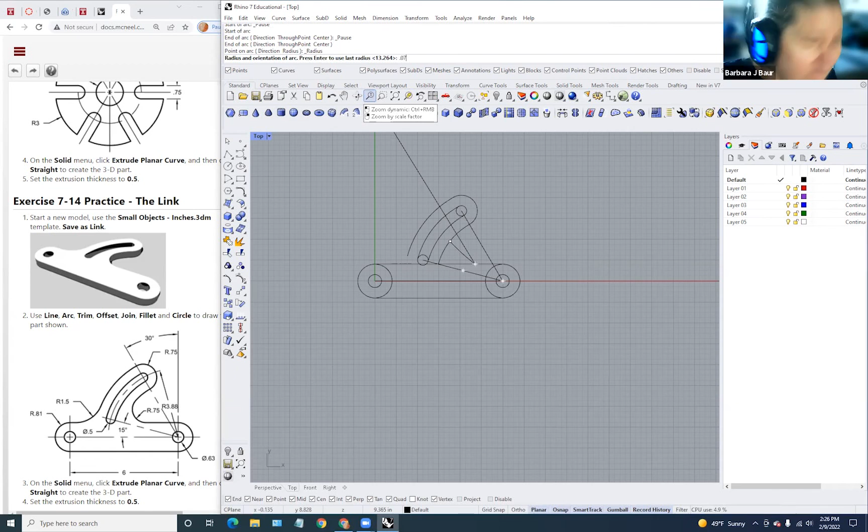And radius, what's our radius here? The radius is 0.75. Oh, 0.75. Enter. And whoop, that isn't working. Wait, here we go. Wait a minute. Enter to use 0.75. Enter. There we go.

All right, that is not right. I can tell it's not right. And this radius is 1.5. I'm using the wrong command, I can tell. No, that ain't working. Okay, but it is 2:29 and I have to let you guys go. So, all right.

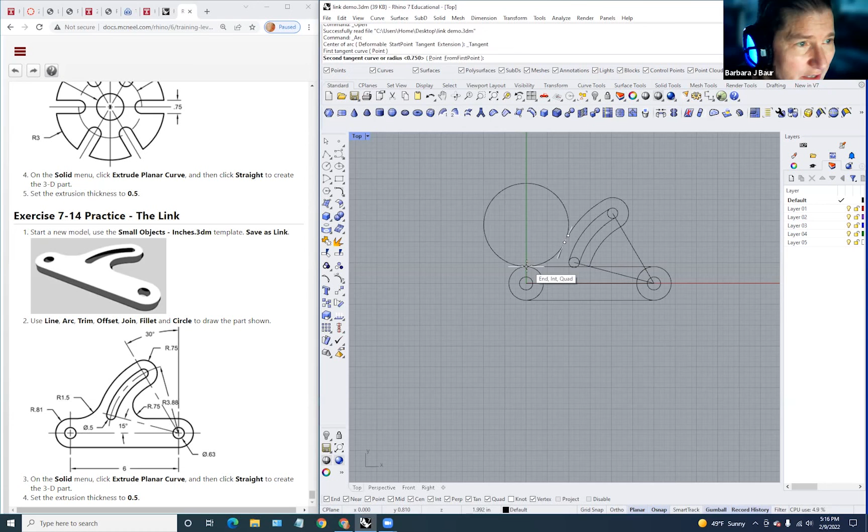And what we need is the one down here. It's the arc tangent radius, and it's in the lower part of the arc menu. And what you do is you get this little tangent and then you move the other tangent. And then here's where you can put in the radius. And the radius here is 1.5.

And then you move your mouse to either side of the tangents, and there's where we want that one. So now this one is 0.75.

So I'm going to go back again into the arc menu, and it's right down here, arc tangent radius. There and there. And now we're going to put the radius in again, and that is 0.75. 0.75. Okay. And there we go.

Now, at this point, we've got all this stuff, and we can go ahead and use split and join and all that to create it. First of all, I know I don't need these. Delete and delete. We've got a curve here as well that we don't need.

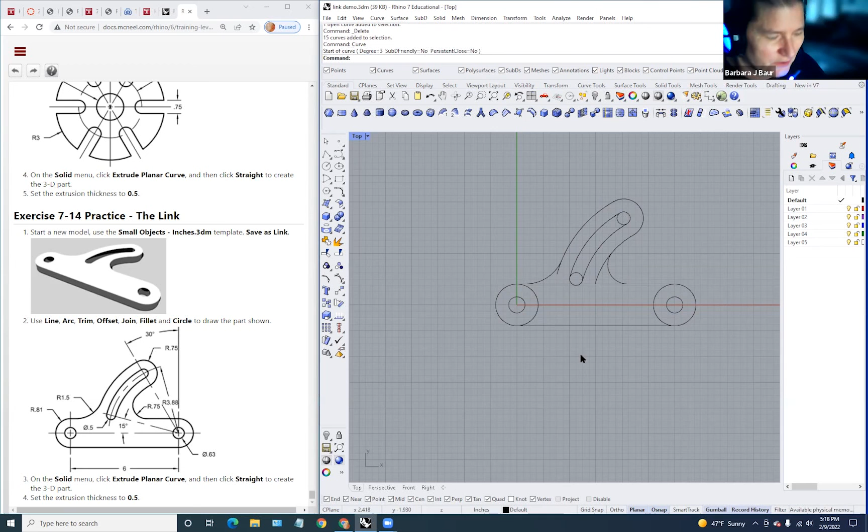We want to keep this, and this. Okay, if I hit enter, I can take that one curve and these two, and this, and we can drag them away.

Or undo. What we can do is we can do the curve Boolean command again, C-U-R-V-E-B, and we can tell it to delete the input all. And now we'll click inside those regions we want to keep again.

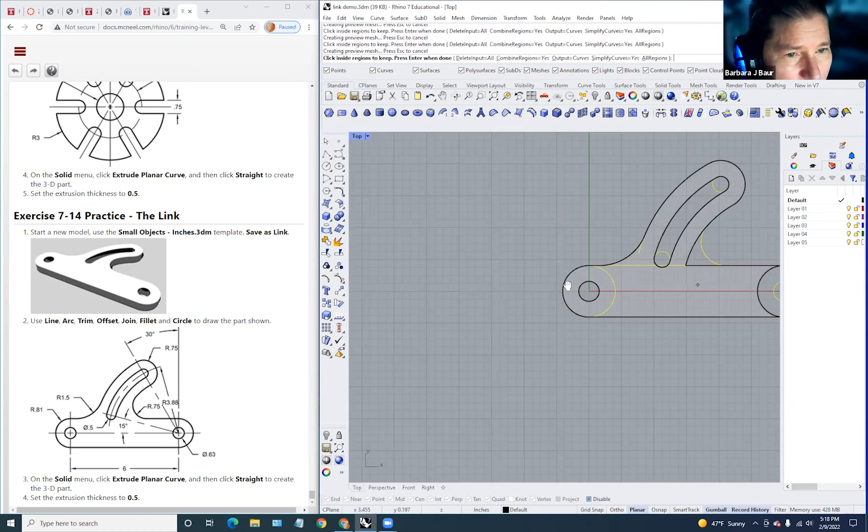Okay, and do we want to combine the regions? Yes. Output is curves, simplify curves. Yes, okay, okay. And here it is. That's all joined. These are joined. It's all good. This is the link.

We're going to now extrude it to extrude planar curve straight 0.15, or 0.5 inches. There we go. And whoop, escape. We want to make this ghosted. Here we are. And that there is the link assignment.